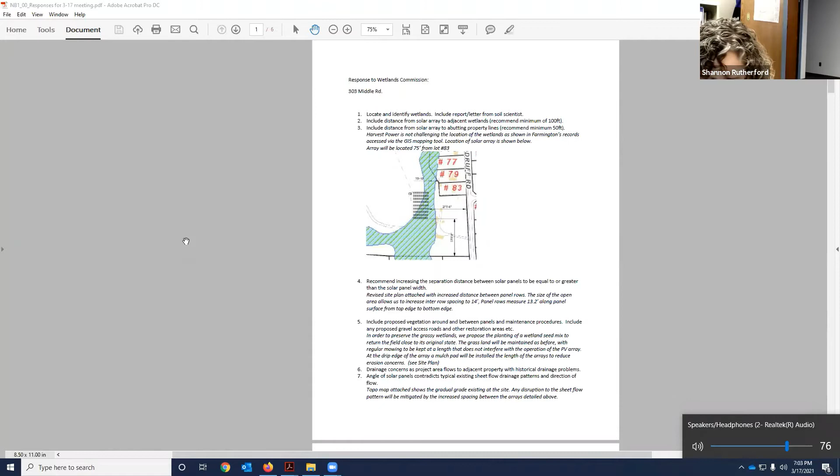So if you want to go ahead and discuss with the commission the additional information that came in last night, and we'll go from there. Okay, thank you. Thank you.

Yes, we appreciate the comments. This written response is to the comments that I got, I think it was actually just before the meeting a couple of weeks ago. And we added some more information based on some of the verbal comments that we received on the Zoom meeting last two weeks. The first three comments were really to identify the location of the wetlands and the solar system in relation to it and the property lines.

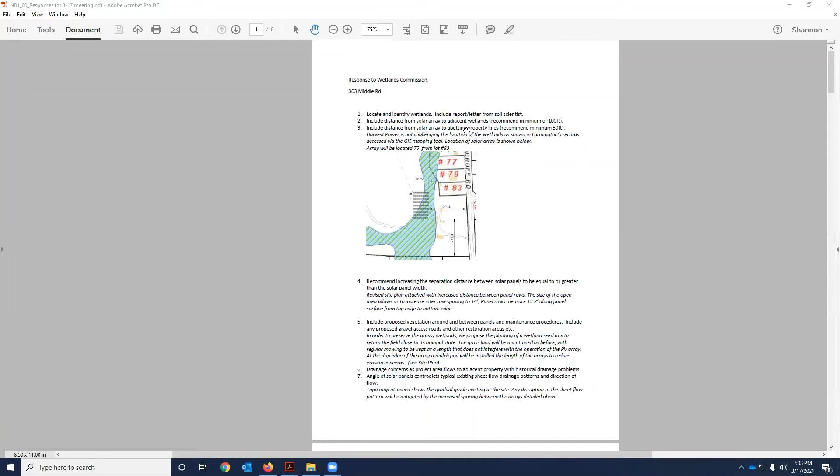Again, this is just to clarify what I said last time. You said locate and identify wetlands and include a report letter from the soil scientist. In no way are we challenging the town of Farmington's record of where the wetlands are and where our solar is. As you can see, it sits not quite squarely in it, but substantially in it. As a result, our application is about whether that has an effect on those wetlands as it is there. Like I said, in no way are we arguing that we're not in any wetlands. So that's really that point right there.

And of course, we're a minimum of 75 feet from the nearest neighbor, number 83 there, that lot off of Woodruff Road.

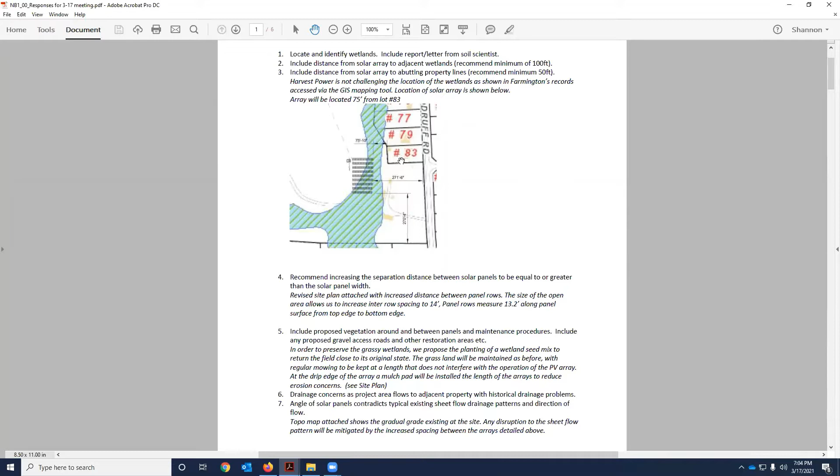Do you just want me to go through and then we'll take comments after, or is that? Yeah, why don't you go ahead and do that? That's probably the cleanest way to do this.

So regarding rainfall and drainage, we had the comment recommending increasing the separation distance between the solar panels to be equal to or greater than the solar panel width. Upon review after the meeting, we were able to increase the interrow spacing to 14 feet. That will be a little bit bigger than the panels as they stand. As they're put together, they're 13 feet 2 inches, but as they're tilted slightly, that horizontal distance is slightly smaller than that. By putting a foot or two extra in the interrow spacing, it will increase that gap to be much larger than two panels put together. So the 14 foot will be the distance from the back of one panel to the front of the next, and that'll be an area where rain can fall onto the ground as it is, as it stands and as it was beforehand.

Moving on to increased proposed vegetation around and between panels and maintenance procedures. In between those panel arrays, as well as underneath it where we can, we're going to preserve the grassy wetlands. What we have right there is a field that's been mowed. We propose planting a wetland seed mix to return the field close to the state it's in now. The grassland we maintained as before, with regular mowing to be kept at a length that does not interfere with the PV array. Again, this is just to return as much of that open space, that wetland space, to the state it is in right now, which is a mown field. This is a comment that came up from one of the commission at the last meeting, which we thought was a good idea and which we'd be happy to implement.

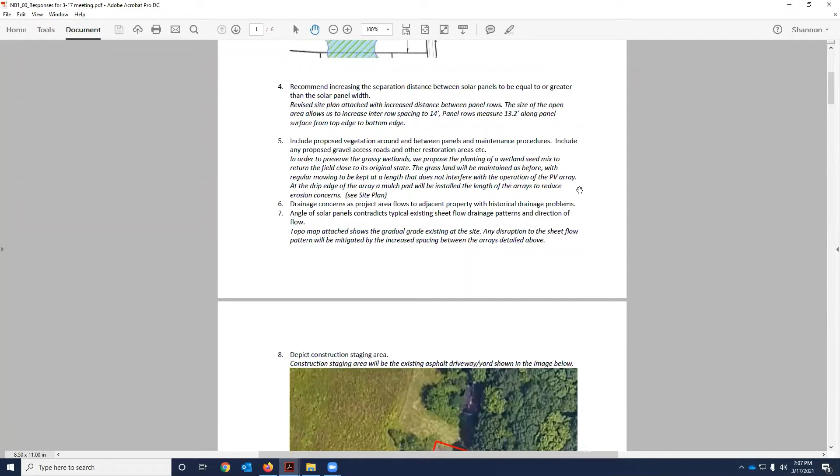Moving on, drainage concerns: the project area flows to the adjacent property with historical drainage problems, and the angle of solar panels contradicts typical existing sheet flow drainage. I added, as a bit of extra evidence, the topo map I got from your GIS website. The area is not too steep, but obviously there's a drainage pattern—it goes to the east and the north. Our solar panels, the only way they can work in this situation, is to be angled south, so that's not something we can really work with to any extent.

But it ties back into the original points: by increasing the gap between the panels, including a mulch pad, and returning the area not covered by solar—and even underneath—to the state it's in right now, will really mitigate any effect of that slight disruption in flow pattern. The rain that falls on the solar array will drip and drain to the south off that array, but then it will just resume the drainage it was going to do anyway if there wasn't a solar system on this site.

Moving on, number 8, depict the construction staging area. We're just using the site as it is. There's an asphalt driveway coming into the site where it's going to end right by some maintenance sheds and outhouse buildings, and there's an existing yard, kind of an open space there. It's asphalt or hard pack, and that's where we'll stage—where we'll set our equipment before it's moved onto the array and installed.

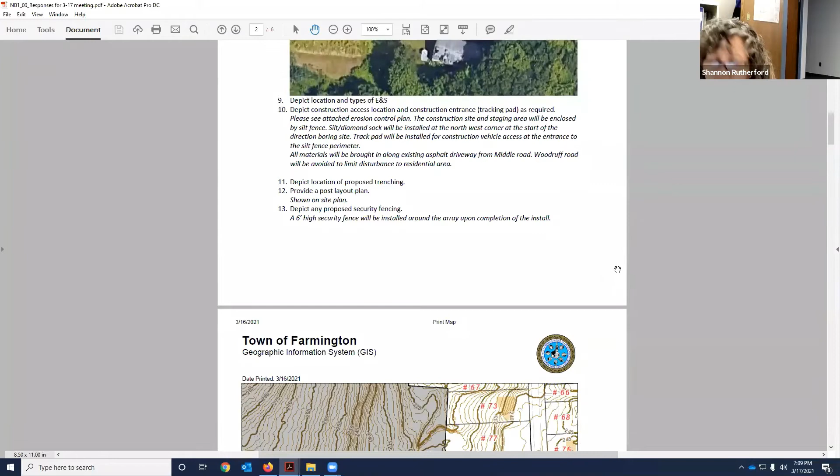We can go on to number 9 now, depict the location and types of erosion and sediment controls, and number 10. I had this as a separate attachment, Shannon.

It's a simple and effective erosion control plan that we're going to do here during installation. As you can see, we've got the array located within the wetlands as it stands.

During construction, we will be bringing materials in from Middle Road. That's the longer access from the west, but it will avoid any disruption with the residential Woodruff Road. It's not a lot of material to bring in, but there will be a few semis, a few flatbeds, and we want to avoid disrupting the homeowners there.

As we get close to the site it will be encircled by a silt fence, shown by that black line around it, just to avoid any erosion or sediment loss from outside of the construction area. As the trucks enter, they will go over a track pad just to remove any dirt or material as it's leaving or coming in. That will also encompass the staging area, shown between the 2 buildings in the southeast.

As an additional protection measure, where we're doing the trenching and boring in the northwest corner back to the site, we're going to install a bit of silt sock over there as an additional erosion control measure. It's a pretty simple but effective measure to keep the site self-contained and limit any effect we have as much as possible.

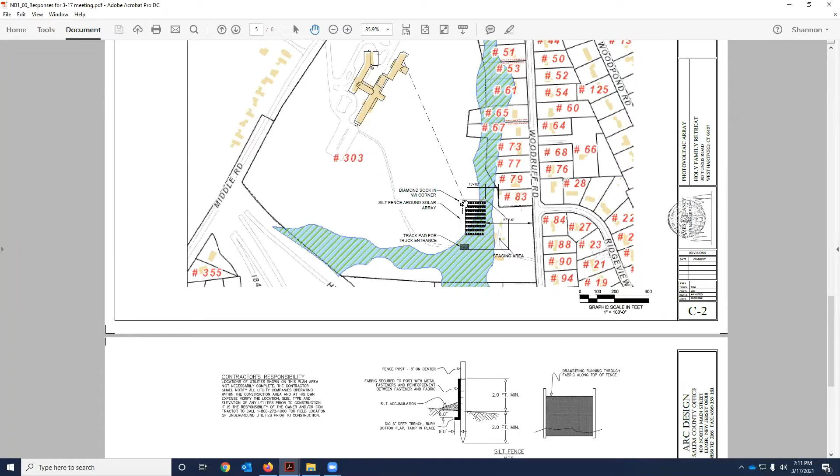Okay, we had a couple more points. Depict the location of the proposed trenching. That's from the northwest corner of the array, where our AC conduits will leave the solar system and head over to the eastern edge of the existing building, which is where their service is. That's it right there, and that's actually a wooded area in between.

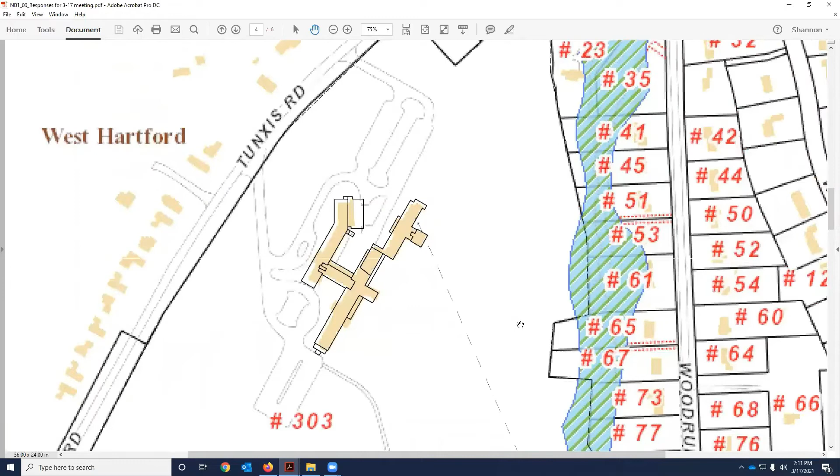And I think the final item was about security fencing. We went back and confirmed this - once we leave, at a perimeter distance of about 15 feet from the edge of the array, there will be a 6-foot high, probably chain link, security fence installed when we're done, just to keep people away from the array and as an additional protection measure for the system.

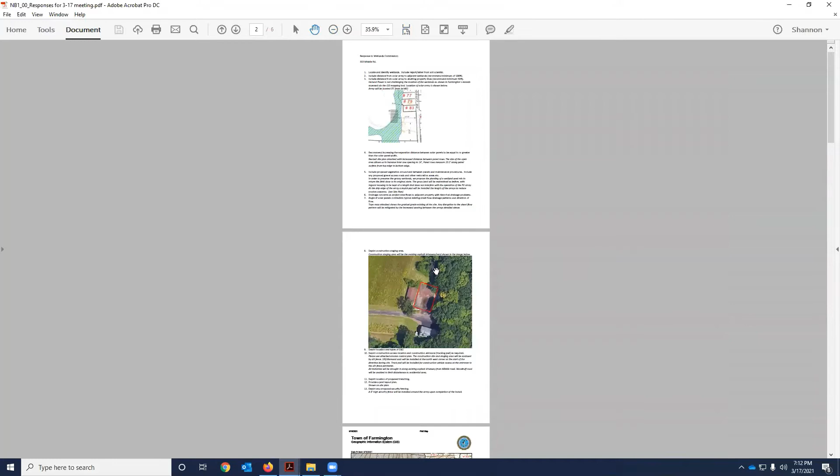So, having said that, I think that addresses those points. If anybody has any questions, we'll be happy to answer them. Going back to the original protocol we've been doing.

Rich, I'll start with you. Any questions or comments? Yeah, I have one question. I understand you're using directional drilling to install the conduit from the array to the building - is that correct? Yes, that is correct. We're going to do the directional boring starting in the northwest corner, back to the building. That's the goal, is to go all the way back there.

Of course, as we get into that wooded area, there may be some areas with rocks and stuff where we may have to do some trenching. But the goal and aim is to do as much as we can with the directional boring machine. Okay, usually when you do directional boring there's a bentonite slurry that's used.

Will you be drilling from the wetland area up to the building, or the other direction? You want me to jump in here, Tom? Yeah, could you call that? Be a good one.

More than likely we would be drilling from the wetland area uphill from that area. But in reality, let's start with probably the northwest corner - about 50% of the array is open field and grass on that side, and then there's a wooded area. So as far as setting up, we can go either way. We're also open to whatever recommendations there are as far as whether we trench or directionally bore, or both. We're not opposed to whatever means and methods. So if there's some concern about the bentonite, we can definitely trench in lieu of doing that. We're not opposed to that.

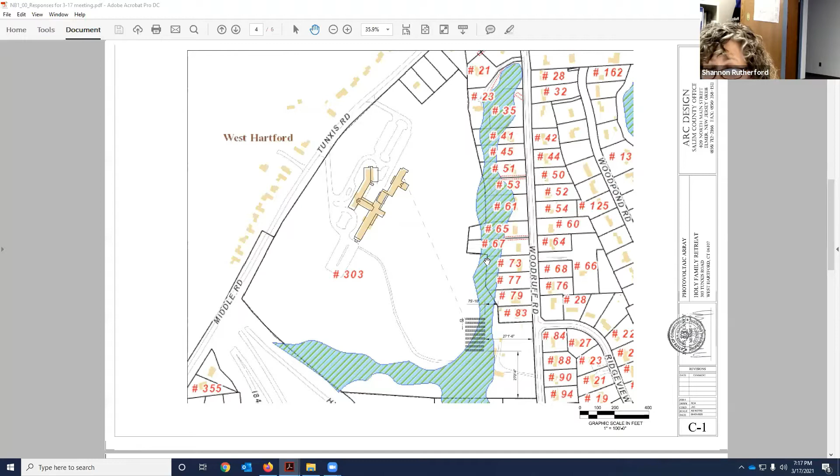So Bruce and I will look at it when there's a pre-construction meeting, and if there's maintenance things that need to be done, then we'll alert the individuals - whether property management or otherwise - that can be handled as part of this project. Okay, thank you. Yes, that's all I have.

Okay, Robert, I have no questions. Mark, no questions. Ned?

Yeah, I want to confirm - is there going to be any grading done in the area of the array, or is it basically sticking to the existing grade? It'll be sticking to the existing grade in the area. Okay.

And there is going to be—oh yeah, I see it here—a tracking pad for the trucks. Okay, yeah, that's all I had. Thank you.

Okay, Jay? I don't have any questions. I do.

Can you elaborate a little bit more on this mulch pad that you're talking about at the drip edge? The reason I'm asking is because mulch tends to deteriorate rather rapidly, so that to me indicates it's more of a high maintenance scenario. I don't know if you've looked at anything like crushed stone as a way of dealing with it. And in combination with that, would what you're proposing act in any way as a way to hold some of the water back and keep it in sheet flow form with this mulch pad for the drip edge?

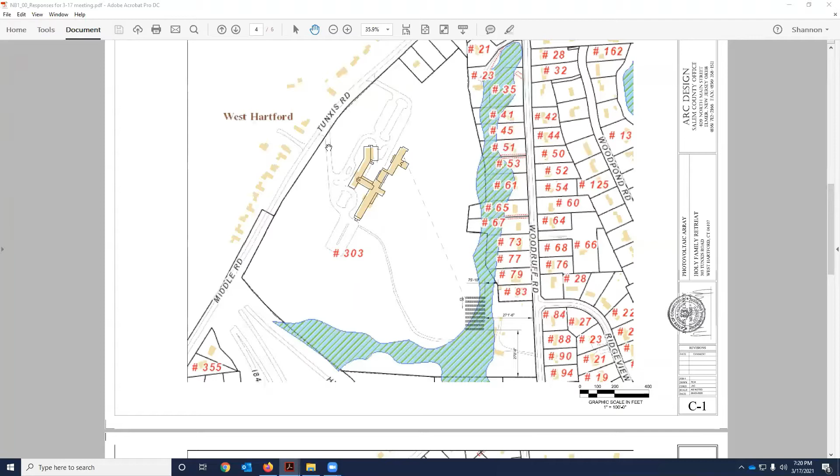Okay, and the current drainage pattern in this area—what is the current drainage pattern? We could hang on—go to the... yep, I just gotta.

So this is the access road coming down from the top. These are the buildings where the construction yard's going to be. Here's lot 83, so the solar field is right in and around here. It's very flat. We've got contour 235 here. Contour 230 is over here. I've got another 230. This is still the 235 here. Both of these are 230.

Bruce has been out at the property a number of times—Bruce here, our development specialist. The driveway almost creates a high point. You can see there's a little bit of a channel here with some of the contours. Some of this drainage flows in this direction, then meanders at the back of these properties, and ultimately picks up a drainage swale that runs—you're seeing just the start of it here—north along the back of the properties on Woodruff Road, some of which we've been in on site walks. And then it crosses under Woodruff, under Wood Pond, and then into the lake.

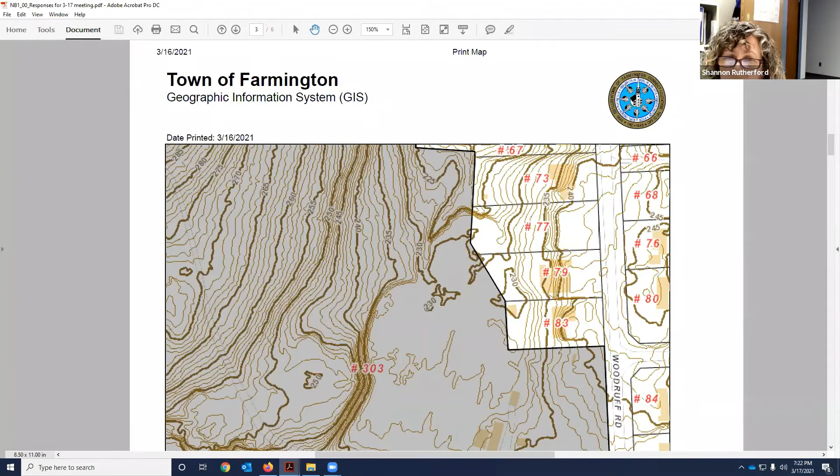So somewhere in here is a drainage divide. Okay, so basically it looks like you're staying pretty much at the 230 elevation for almost the entire area. Correct, yeah, for this solar. Correct. Okay, all right.

Another comment, it's a suggestion. Based on what I have seen from other solar projects around the state, one of the things you may consider doing with your fencing is going 7 feet high, and the reason is not so much for people but for deer. I would also recommend you mount the fence 6 inches above the ground, granted this is not that large of an area so it may not be as critical, but typically we'll see like a 6-inch gap underneath the fence between the bottom of the fence and the ground so that it allows critters to continue to have access.

So that may be something that you want to consider installing. But I think the 7-foot high fence is probably better, especially since my guess is you've got deer in this area, and I'm not sure a 6-foot fence will keep them out. They get over the fence, you've got problems. So it may be something you want to take a look at. It may save you a lot of issues going down the line.

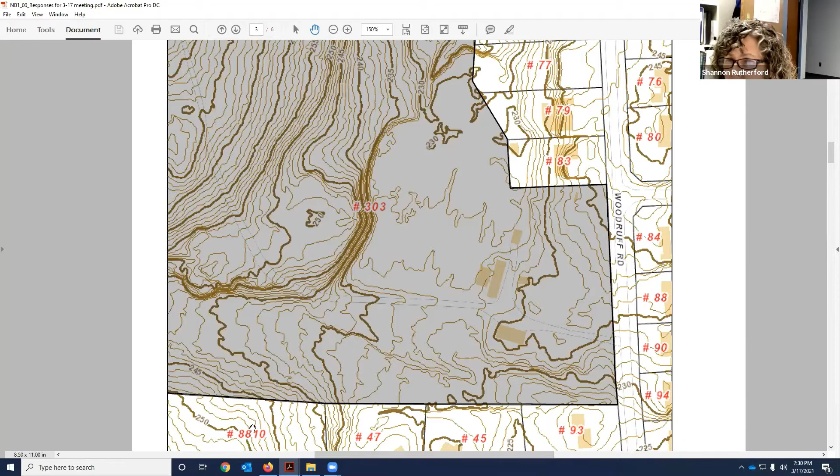Next on the agenda, Miss Porter School, 60 Main Street. Talking about the connection of Sarah Lane, and I couldn't tell you where that was to start with. It's an internal roadway. I believe we've got Katie Bradley on the phone with us this evening.

If I may interrupt for a moment, I need to recuse myself from this one as an employee of Miss Porter's, so I will be stepping back. Okay, thank you.

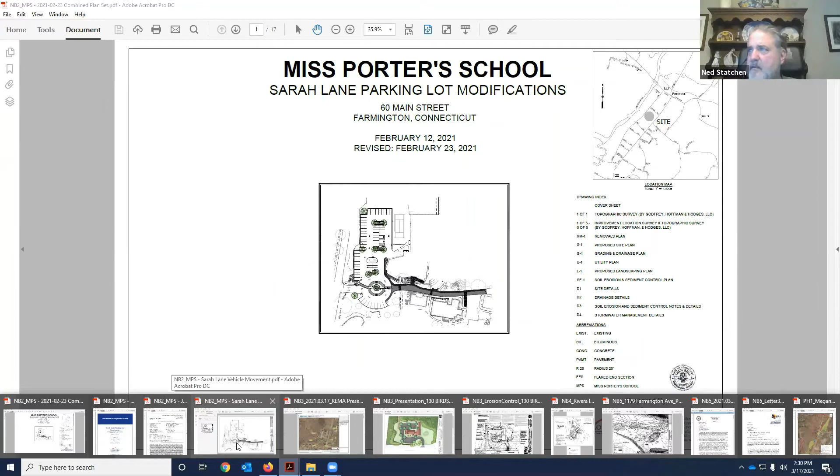Okay, excellent. Good evening, everyone. My name's Katie Bradley. I'm here tonight representing Miss Porter's school. Just briefly, over the past 20 years, we've engaged in 4 separate master plans.

On every one of those master plans, Sarah Lane, which is the internal road that runs from Main Street to Garden Street through the center of our campus, has been identified as something that we should address, mostly because of safety. It's a major thoroughfare for our students throughout the day, passing back and forth, but it also is the means of a lot of our deliveries on campus.

And it never seems to make it to the top because there's always something more glamorous and shiny to spend our capital money on. And we built fields and a library and a pool.

Fortunately, 3 years ago, our Board of Trustees decided to renovate 60 Main. We needed to update our 1950s kitchen. And in order to do all of that work, we have spent over the last year and a half digging up Sarah Lane to update our antiquated utility systems.

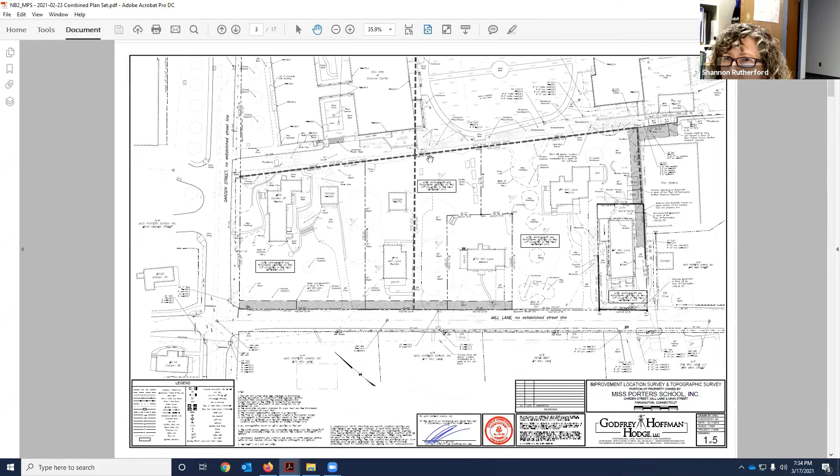Hello, can everybody hear me? Yes, we can. Hi, my name is Tristan Wallace, and I'm with Lorero Engineering out of the Plainville office. As Katie said, I've worked with her for the past few months in the design and layout of the parking area in Sarah Lane, as well as the drainage design. If you don't mind, we can start with the existing conditions.

So I just wanted to identify this sheet, which shows the current conditions of the site. There's an existing parking lot, and the hatched area is an easement, which is a throughway going up to Sarah Lane. To the north are 3 tennis courts, 2 of which we'll be removing. We'll see that in the site plan.

And then to the south, there's a wetlands pond area where the survey was done by Hodge, and the wetlands was flagged by JMM Wetlands Consulting Services in July 2020. The wetlands pond, from what I can surmise, is a wetlands retention area, designed originally for stormwater drainage.

You can see there are 2 pipes that come down into the wetlands. And if you look at the southwest corner of the parking area, there's a curb cutout — in the corner of the hatched area that kind of protrudes towards the wetland, there's a cutout there where some surface flow comes down into the wetland as well, bringing in some of the drainage from that portion of the site as currently stated. So we can go to the site plan.

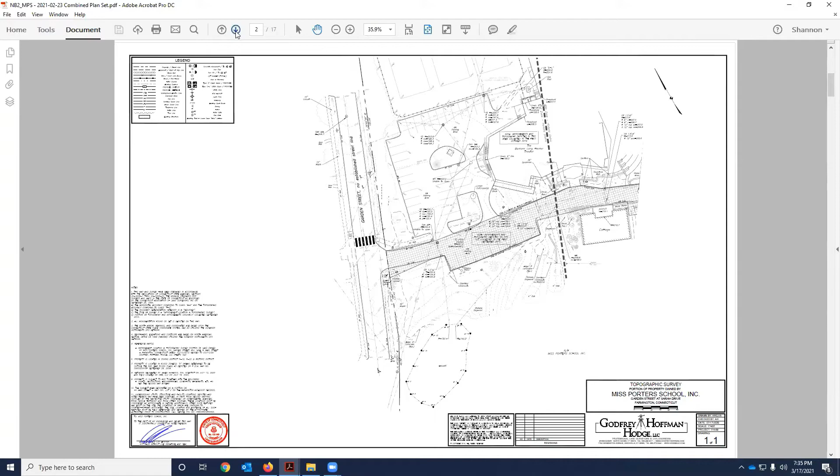Should be the next one, yeah.

As Katie mentioned, we're doing a full redevelopment and reconstruction of the parking lot area on Sarah Lane. To the north, the two tennis courts will be taken out to accommodate additional parking. Towards where Sarah Lane and Garden Street meet, a roundabout will be installed to facilitate a drop-off area for evening and morning drop-offs. South of that, we're proposing about 9 additional spots to increase parking. I believe Ms. Porter's could never have enough parking.

So that area will help accommodate the additional parking necessary for the property and its use. We are also improving the Sarah Lane access way with pavers. The width and configuration will stay pretty much the same, however it'd be resurfaced. Currently it's a mixture of bituminous concrete and walkway, so we'll resurface it with pavers to add another level of aesthetics.

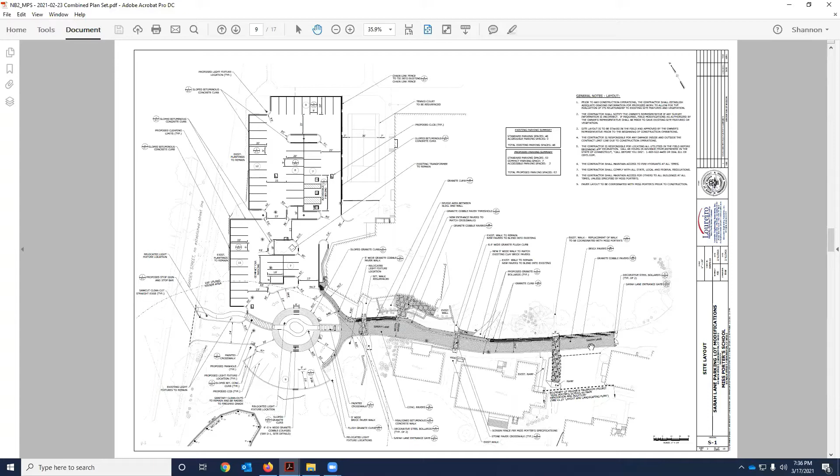As we'll get to in the later stages with the drainage plan, we're also improving the drainage in that area. So we can focus on the upland review area for the drainage in the grading plan. We have the upland review area shown with that buffer line. The roundabout area and the additional parking encompass most of that upland review area, as well as some ancillary grading to accommodate the parking.

We are providing an overall improvement on the drainage for pretty much the project area. The amount of the area is about 1.323 acres, and most of that we are capturing in the new drainage system.

As you can see, we have new catch basins and new conveyance ways, a detention system which will also have an isolator row. At the last catch basin, right before the discharge into the wetland, we're also providing a hydrodynamic separator to treat the runoff from Sarah Lane and any runoff in the parking area not captured by the detention system. Overall, we're reducing the flow to the wetlands pond in all storms, from the 2-year storm up to the 100-year storm. So there's a reduction in peak flow and an improvement in water quality as well.

We can go to the soil erosion and sediment control plan. Is that one more? Utility or landscaping. There we go, yeah.

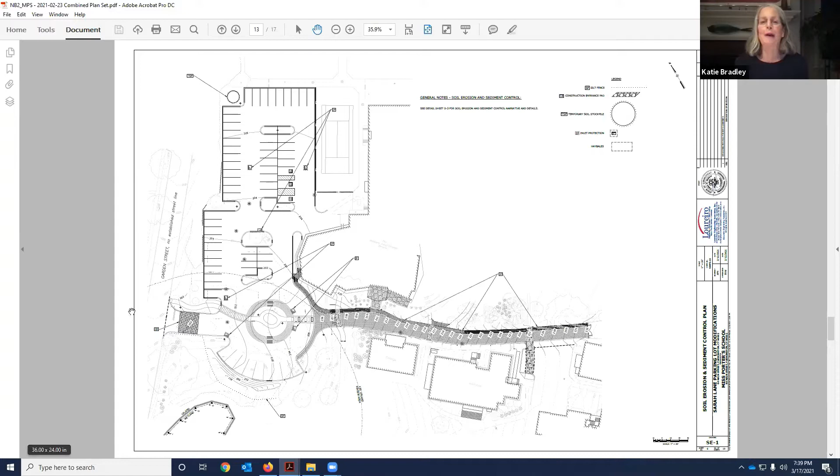I don't know if Katie, you want to say anything more, or we can take questions at this point. Unless you want me to say more, Shannon? No, that's fine, I can talk for hours, but I'm pretty sure you want to get answers from Tristan. Yeah, no, that's fine, we can go to questions. Where'd my chair go? I'm here, I think, there we go.

Rich, any comments, questions? The only question I have - I'm a little unclear where the outlet from that wetland area is and where it goes. Right, so the wetland outlets to the southeast, it's not shown on this plan, but it goes underneath Garden Street, where I believe it continues on. Either it ties into the drainage in Garden Street or it continues on underneath. I'm not fully sure, but for the basis of our design, we felt since we weren't increasing the peak flow to the wetland, the outlet would be able to handle any flow we were presenting.

Okay. No other questions. Okay, Emily? I have no questions, thank you. Okay, Dave? I don't have any questions either. It's less flow and more treatment, so it looks good.

Mark? Yeah, as I see the improvement that's being put in, I think it's going to do more to protect the wetlands. Construction is going to be nearby, but I think they're going to take controls to make sure nothing affects the wetlands, so I'm fine with this.

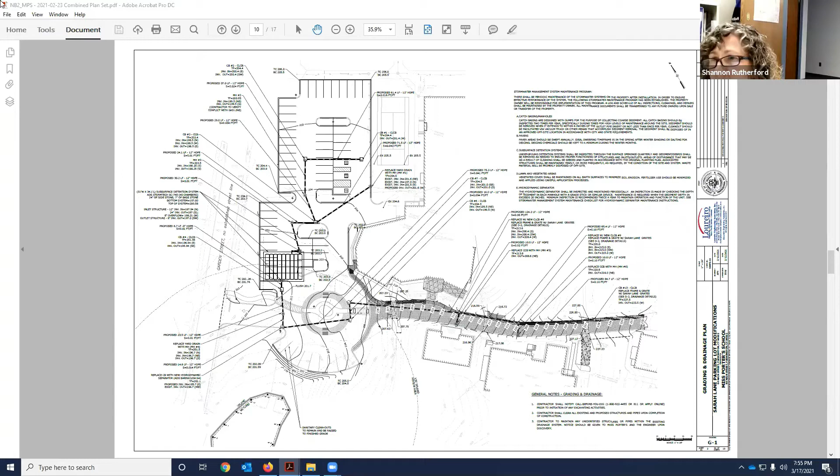Next item on the agenda, 130 Birdseye Road, a regulated activity to upgrade a parking lot design and related site improvements.

Yes, and I believe we have Biff Schechinger on the phone. Hi, I'm Biff Schechinger, landscape architect, licensed in Connecticut. This is the proposal for renovating the old Connecticut School of Broadcasting into a medical office facility. With me is George Logan. I'll let him go through the wetlands analysis and everything, but I'll give you the highlights right now.

We're not impacting any wetlands directly. There's no water quality renovation strategies installed in this currently, which we are going to install. We've worked pretty much within the development envelope, except for creating these two water renovation basins. We've reduced impervious coverage on site, and we've also reduced it significantly, 1,600 square feet plus within the upland review area. So with that, I'll let George take over and go through the wetlands, and then we'll just wrap up and answer questions.

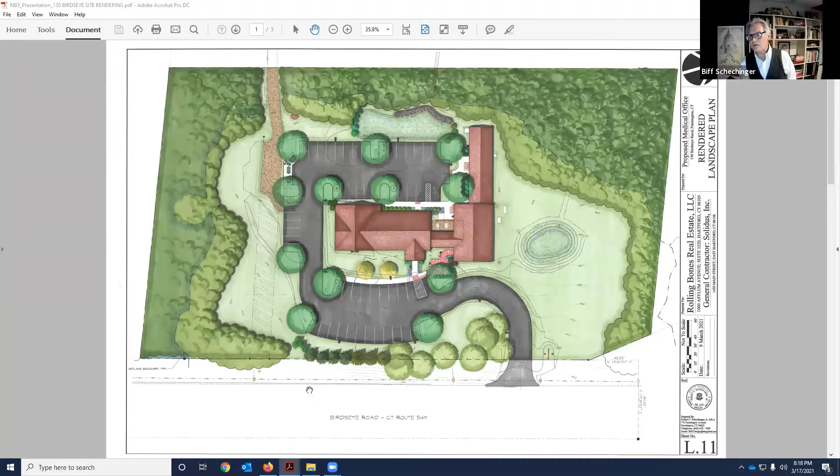And then my other question is, on this project, the footprint of the building is not changing at all? That is correct. And is the roof runoff addressed? We're picking all of it up. There are only a few roof leaders, and we're picking that up in front - you can see they come into the yard drains. In the back, everything just sheet flows; there's not enough topographic relief to discharge them any other way.

But they were all accounted for - that entire area was accounted for in the renovation water quality basins. Okay, that's all I have.

Thank you. Sorry, Ned. Is Mark back on? Yes, I have no questions. Okay, I've got a couple.

I didn't have a chance to really look at this before the meeting, so can you explain how you propose to construct the filtration berm? I think there are specifications on the plan, and George can correct me - it has an internal core of coarse sand and pea stone wrapped in Mirafi 140, and on top it has modified riprap.

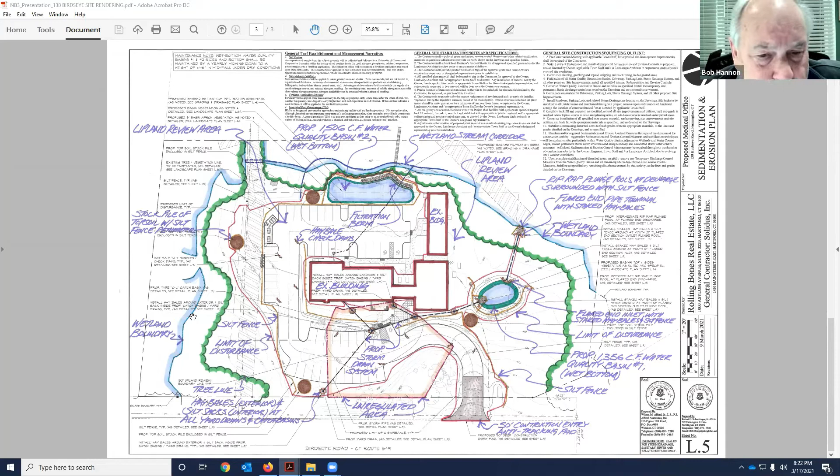Sure. And the one other comment I'll make, having grown up about a 5-minute walk from this place, I fully understand what you mean by having a very complex system of catch basins - or sump pumps in the building, because our house was just right down the road, and we've got 2 of them there still filling every spring and wintertime. So I can appreciate what the groundwater is like in this area. If that's something that could tie off into the water basin you're putting out there, that might be a little better than just having it run out. I think that's one of the things you said you're thinking about doing anyway.

Good point. The one thing, if you remember George's photograph, the whole northern half of Basin 2 on the western side - right now there used to be foundations for a group of satellite dishes there, so that's been a very disturbed area. We tried to utilize the areas we had available, but that area was eminently usable. When you saw the photograph where he showed his car in the background, and in front you saw some concrete cones, that's the area pretty much where the basin comes to on Basin 2 in the back. I can tell you for sure that western boundary - the wetland used to be probably into the parking lot originally, and that's been filled and then ditched. So that's all disturbed areas, nothing natural there.

Okay, that's good to know. Thank you.

I had another question. With the previous use of the building for the broadcast school, there are some antennas behind the building. Are those tied to this property in any way?

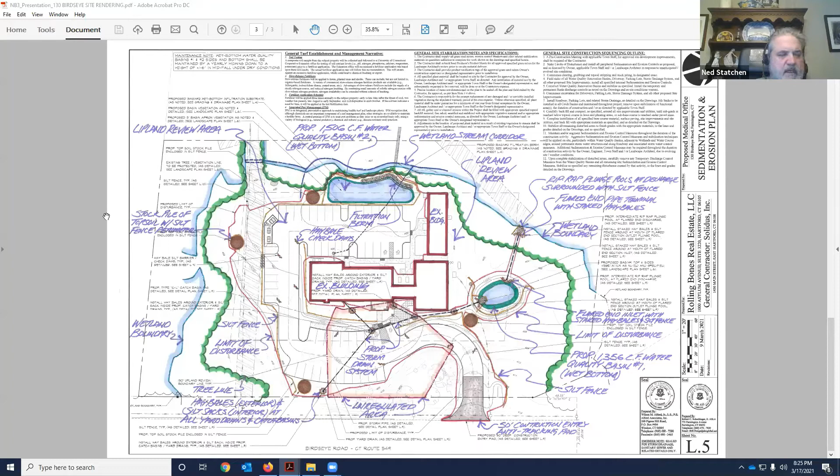Here's my question. I understand the road, and looking at Google Earth I see the cell tower with all the antennas, but there are also 3 towers. If I remember, when this was a broadcast school, those were tied into the school. Now is there any kind of relationship between the change of use and those towers? Who's responsible for those towers now? If this is no longer a broadcasting school, who's responsible for them?

Those towers are a separate entity. Whatever the easement says, I can look up the plan right now. Give me a second. The school used to have satellite dishes, and those are where those concrete stumped-up areas are, right in there, and we're taking those out as part of basin 2. They show up on Google Earth. I see the satellite dishes, but it looks like there are 3 antennas in addition to the cell tower, and I wasn't sure if somebody was responsible for these.

So, those are up, here's the property line. These towers are on the property behind, which is quite extensive. The company is called Easement in favor of Sprint Spectrum, so they own and maintain those towers. They're still being used, yes absolutely, and they have no relationship with the facility.

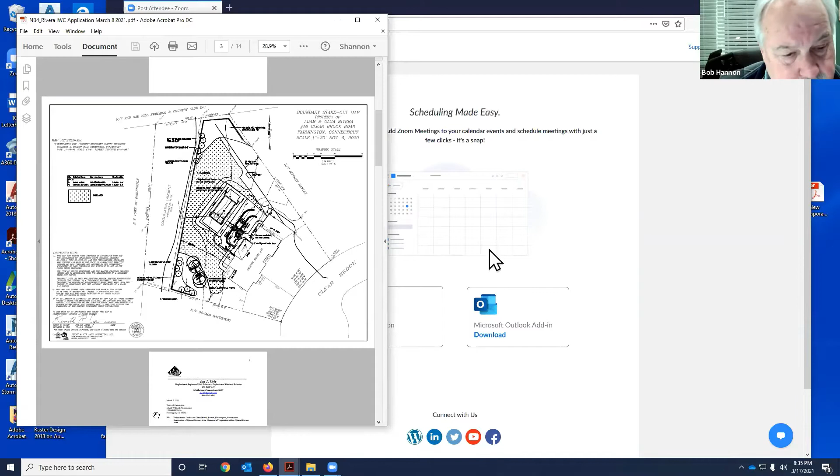Thank you. I think we have both the homeowner and Ian Cole on this evening. I don't know which one of you wants to take the lead with this, but you're welcome to jump in.

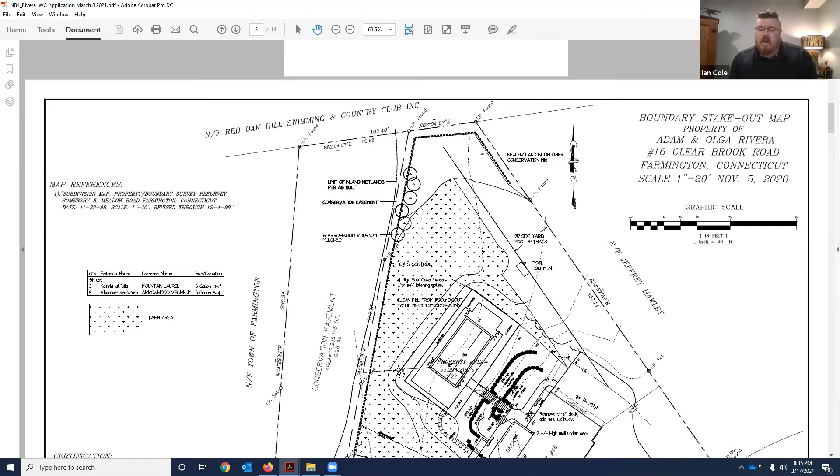Sure, good evening. For the record, Ian Cole, professional soil scientist, professional wetland scientist. I'm here tonight on behalf of the Riveras. The commission remembers last we met was back in January, the beginning of the year, and then we discussed the enforcement order the Riveras received for the unpermitted clearing of vegetation in the 150-foot upland review area. If the commission remembers, this was a scenario where vegetation was removed between the existing lawn and a conservation easement. We're talking about a 40-foot wide band of early successional habitat that was cleared, bisecting their property. As Shannon had stated at that January meeting, the clearing was done in preparation for the planning of an in-ground pool.

To that extent, at the recommendation of both town staff and the commission, it was expressed to come back to the commission with a comprehensive plan for all of the proposed activities in the backyard and fold in a restoration plan for those activities in the upland review area. So here we are, we came back, we have our planned improvements and restoration activities for the commission's consideration.

These plans were designed in coordination of a team. The Riveras hired Giuliano's Pool, a local landscaping company, Local Choice Landscaping. They worked with a landscape architect, Germain Designs, and again enlisted the survey services of Flynn and Cyr Land Surveyors, as well as myself.

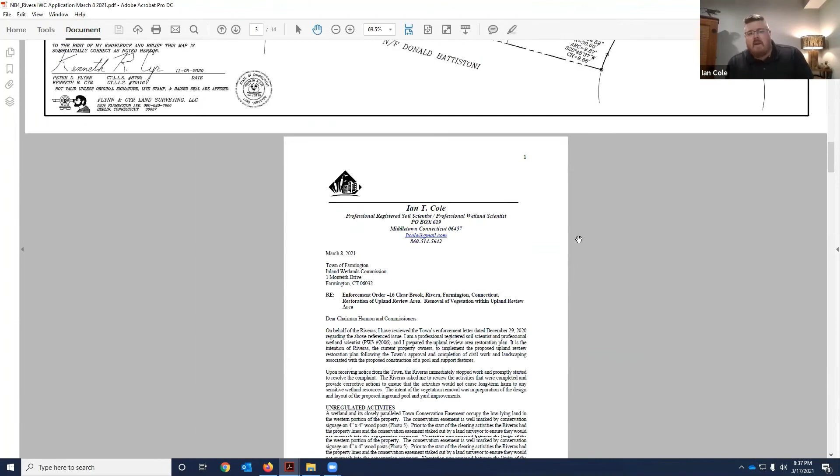Probably the easiest thing to do, Shannon, if you can go to my report that I submitted to the commission and go to page 5 of 11. I have the site plan in there. I've embedded it into the report, and it shows a little bit of color that maybe helps tell the story a little bit better for the commission.

So here we have the property. To the left-hand side, that blue shaded area is the jurisdictional wetland boundary. The sliver of property between that blue polygon and the hatched proposed lawn area, that dashed line, is the actual conservation easement that is marked in the field by 4x4 posts with signage on them. The Riveras, before they started any activities on their property regarding the clearing, had a land surveyor stake out the property line and the conservation easement to make sure they did not encroach into those areas. As was last reported, for the commission's edification, no clearing occurred within those regulated areas of the conservation easement, and certainly not within the wetlands proper.

So I guess the first thing I'll go over is probably the overall plan is the easiest thing to start with. The yellow polygon here is the bulk of the backyard improvements. We can see there's an outline of a pool and some terraced retaining walls that come down to the pool. There's about a 6 to 7 foot elevation change from the backyard where you come off the deck to where you drop down to the pool. So to minimize the footprint of grading, there are 2 boulder retaining walls that drop down to the pool. All the material for grading on the site is really going to be recruitment from the excavation for the pool, so we'll have the beneficial reuse of that. We're not anticipating importing any materials. This isn't a big earth-moving activity.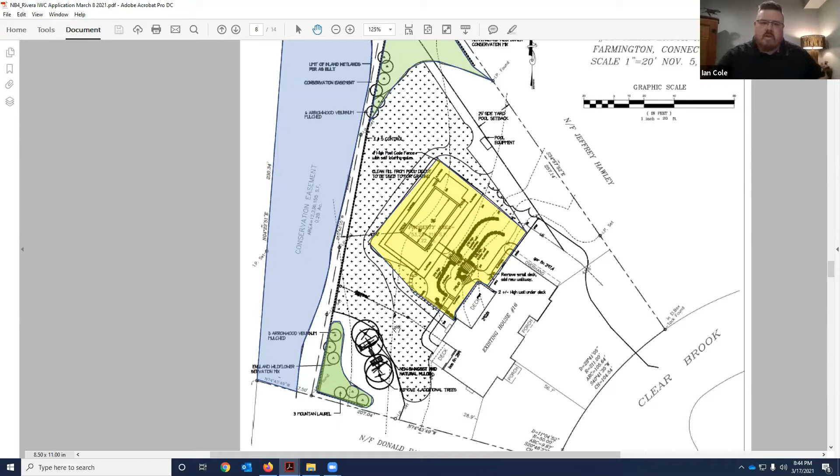And I think it's important to note that the sensitive part of the wetland is the inflow channel part. There's an intermittent water course that runs along the extreme western limits of the property, and we're over 60 feet from that - a 60-foot vegetated buffer that's very, very flat.

In my report, if we could scroll down, there's some figures and background information so we can see the limits of what was done.

So on page 6 of the report, if you remember, this goes back to 2009. It kind of shows the conditions of what the backyard was. Here we can see in the middle, where the cursor is, early successional habitat, and then we have a forested area to the north of that clearing.

If we scroll down to the next figure on page 7, in contrast this is 10 years later, 2019. Again we can see the area that was cleared, shrubby early successional habitat, and we can see the establishment of the lawn there, kind of in the center of the property where it says lot 16.

And then we'll move along to figure 4 on page 8. This is just a bird's eye view of the property. We can see that hole in the middle of the forest canopy there, that was the early successional habitat. And you can see in relation where the water course lingers along the western property line.

Moving along to page 9, I have a couple photos of what the area looked like prior to the vegetation removal activities in the upland review area. It might be a little hard to see, but in photo 1 we can see that tree line in the background. That is essentially the tree line of the conservation easement that's staked out. So everything in the foreground here is the type of vegetation that was removed. Again, you can see mostly saplings, smaller stuff, shrubby stuff. These photos were taken in November 2020, right before the vegetation removal occurred.

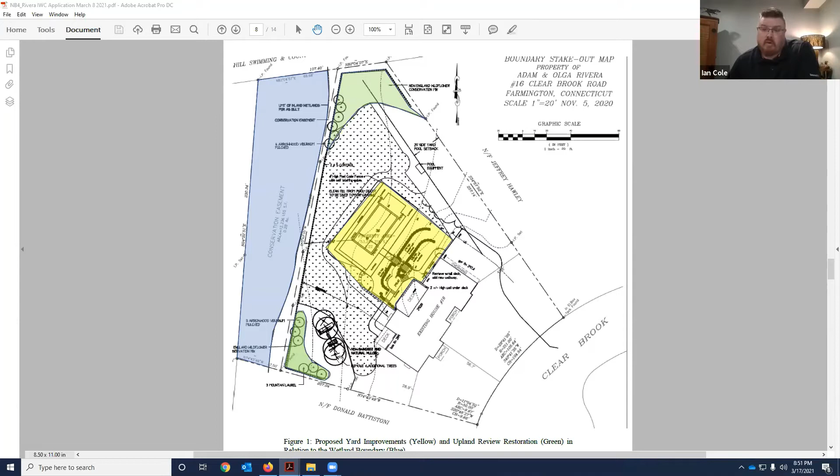Just looking at the plan, you're going to remove 4 additional trees near the swing set? Yeah, those 4 trees were slated to be removed when the arborist and landscaping company was assessing tree health. But they stopped because as soon as they got notice from the town with the enforcement order, they immediately stopped work and started to resolve that issue. So that was an outstanding item. Those trees are close to the house, and with a playscape there, nobody wants some widowmaker above their kid while they're swinging on the set. So that's the intent there.

What are those trees? I'd have to look. There may be, from the best of my recollection, some hemlocks in that area and maples. Okay.

I just, there's been a lot of clearing done out there, and I'm kind of disappointed that we're still continuing with the clearing there. I don't know, there isn't another place to put the swing set.

Yeah, we've moved things around quite a lot on this plan, moving the pool around, moving the swing set. We think this is the most logical place. These trees are not in great condition right now, I can tell you, and they're up against my house, causing quite significant damage, in fact, to the house, and contributing to a lot of mold and fungus on my house. In talking with arborists, the landscapers, the landscape architect and Ian, I think everyone agrees these are not specimen trees, they're not adding any value. They're not that healthy, and there's frankly loads of trees all around there and behind there that go into that naturalized area, and then certainly within the conservation. So that's the best spot for the swing set for us.

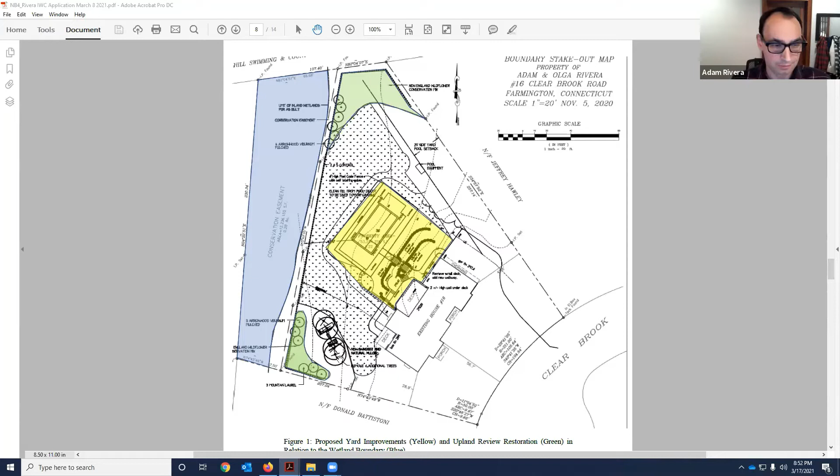Okay, I didn't get from the plan that these are encroaching in on the house, but I guess if they're doing that, then that seems reasonable. It's not, you're right, Commissioner, it's not the best depiction. They're actually much closer to that deck right there, that far deck that you see. In fact, I'm standing in my office, which is right next to them, and when you're standing on that deck, you can reach out and touch the tree branches. That's how close they are to the house at this point. So it's probably on me - I should have been more attuned to the landscape architect to make that more clear, that that's actually closer to the house than they are. Okay, all right, that's all I had.

Jay? Just a couple of quick things, not really questions necessarily, but I'll throw them out there. I hadn't caught about the trees, but I do always take notice when I hear about tree removal, but it sounds like what they're talking about doing makes a lot of sense. This is maybe a more procedural thing - are we dealing with two different things here? Are we still dealing with a cease and desist and the application? To whoever, Bob, whoever wants to answer that. Yes, it is both - we're hearing about both matters simultaneously for a cohesive presentation, but there will be two votes. Okay, that's kind of what I thought. I appreciate that, and that's really all I have. Thank you.

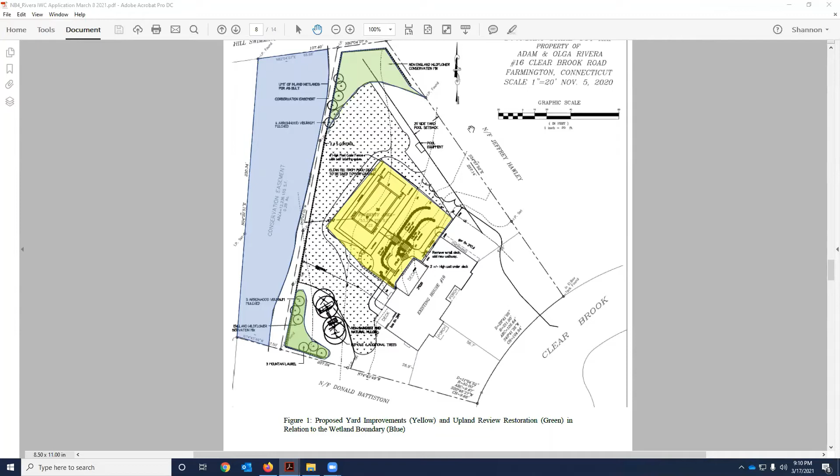And then, this is Ned. So we would, I think, as part of the restoration plan, require a report back from the soil scientists either in the fall or winter, as to how everything has taken.

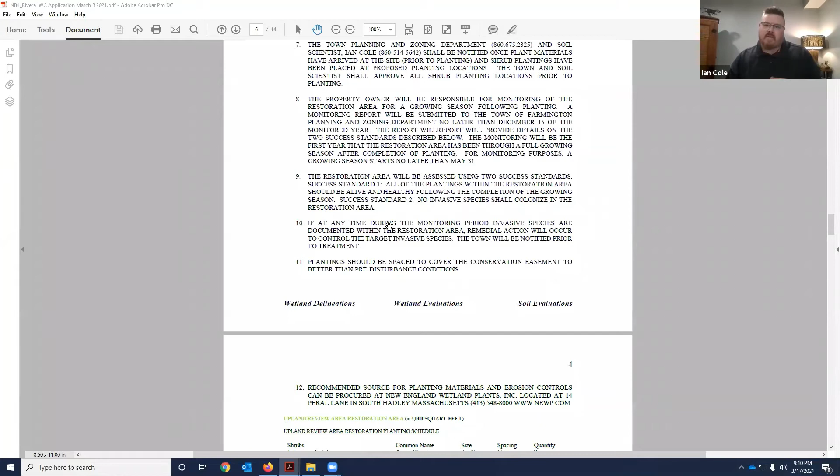Yeah, this is Ian. In the restoration plan, there's essentially 12 recommendations in that plan, and these are kind of the standard language: we'll monitor it for the growing season, report back to the commission by December 15th. We'll notify the town once we secure materials and lay them out, and once erosion and sediment controls are in. Our monitoring report will be assessed off of two standards: one being the survivability of plants and, if needed, replacement of those plants, and two, ensuring that no invasive species have propagated in the area as a result of our activities.

Okay, that sounds good.

So Shannon, we don't need to include the timeline specifically, do we? I mean, we pretty much know what it is, or does that need to be included in a motion?

No, I'll make a note of it in the revised version. So if I can get a motion that approves the restoration plan, and one that—because pretty much the restoration plan, some of these steps pretty much talk about some of that timing—so approve the restoration plan and authorize me to release the cease and desist so that the work can commence, then we should be good to go.

Okay, somebody want to make the motion? I'll move to approve the restoration plan and lift the cease and desist order. The restoration plan should include use of wattles or silt socks in lieu of silt fence, installation of conservation easement markers at 50-foot intervals, that all contractors receive a copy of the Ian Cole restoration plan, that notification prior to work occurring be made to town staff for oversight and scheduling, and that the restoration areas be completed as soon as feasible in the spring.

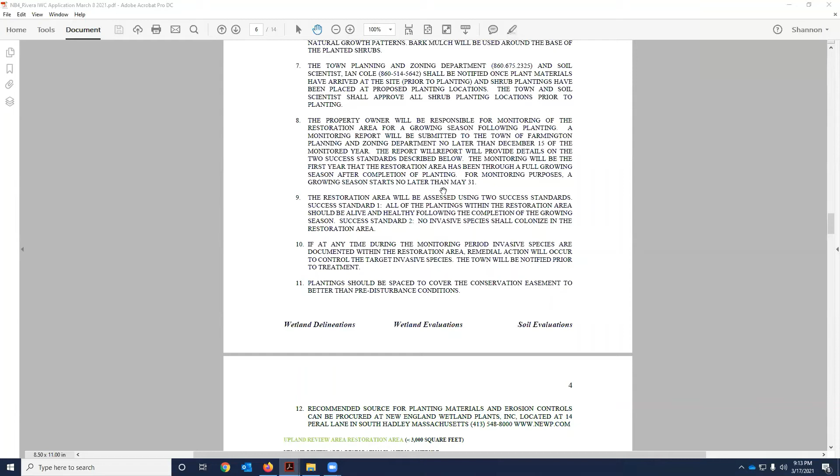So those in favor, say aye. Aye. Aye. Opposed? Abstaining? Okay, so it sounds like the contractors can start figuring out what they need to do.

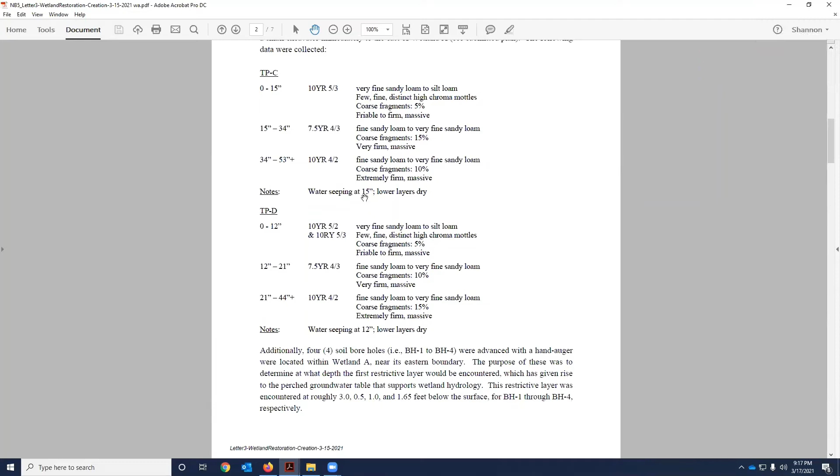If you see the corollary at test pit D, it's a little higher up in the profile, at 12 inches, and we had water seeping at those two firm layers. Underneath that first firm layer there's another layer that's even more dense, extremely firm and massive. That's the layer we saw in earnest on test pits A and B on the other side. We didn't see the first restrictive layer as much on that side, but we saw it on this side.

So what I did, and I'll show you in the plan in a bit, is I realized it looks like we might have a little different geohydrology on this side, which makes sense now that I look back at it. So I went into the wetland with my auger and did four locations to find where the restrictive layer is, which is perching the water in this wetland, wetland A. I put those boreholes in, and you can see it's kind of variable and confusing - 3 feet, half a foot, 1 foot, and a little over 1.5 feet.

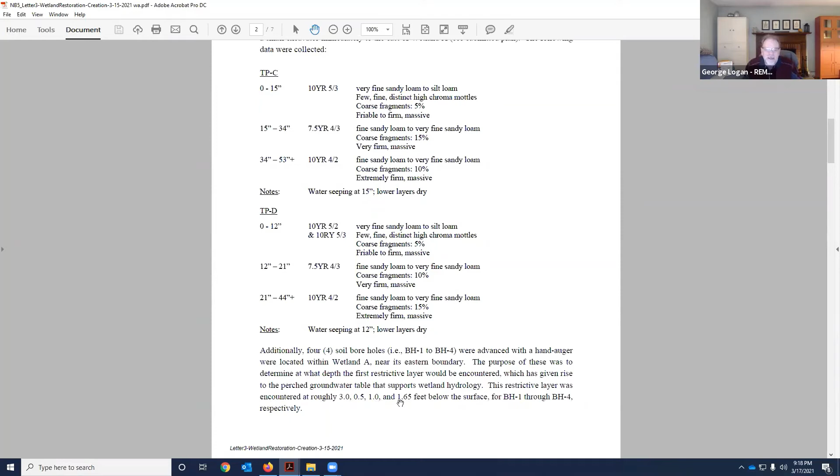So let's go to those pictures, then the plan after, and I'll explain what we're doing. This was test pit C, the first of the second series. You can see there's water in the bottom. There was snow back in January when we did the first test pits, but I did notice it was moist - the surface was moist, but I didn't see any evidence of hydrology below the surface.

Well here it's quite obvious, even though we do have a little more snow, so that might account for it a bit. But what I determined, and again this isn't definitive, just based on what I did, is that the subsurface hydrology of wetland A is perched on these restrictive layers we see here. It's slightly depressional, so you have up to 1 foot or so of water in the central portions, a little less in the surrounding portions that I delineated as wetlands. The delineation was basically done, as you might recall, based predominantly on wetland hydrology and wetland vegetation, because the soils weren't definitive everywhere.

So I think what's going on is the water in wetland A is slowly moving towards this eastern area and away from the western area, and I'm pretty convinced that's the case. So that means this is a much better area for us to ensure wetland hydrology.

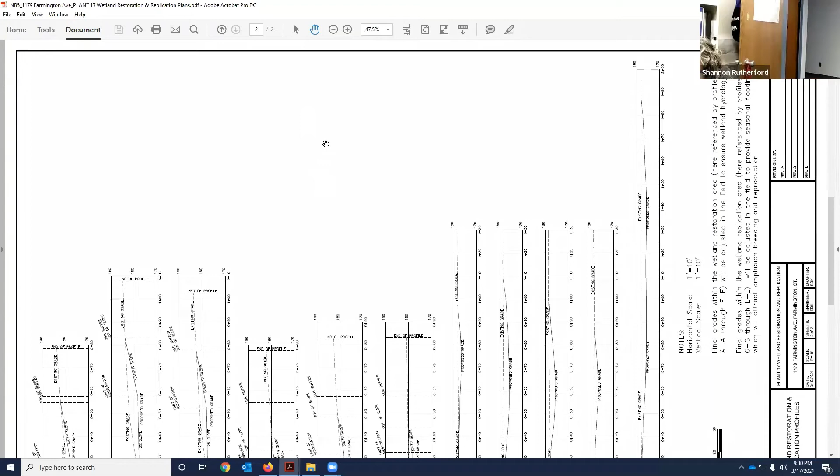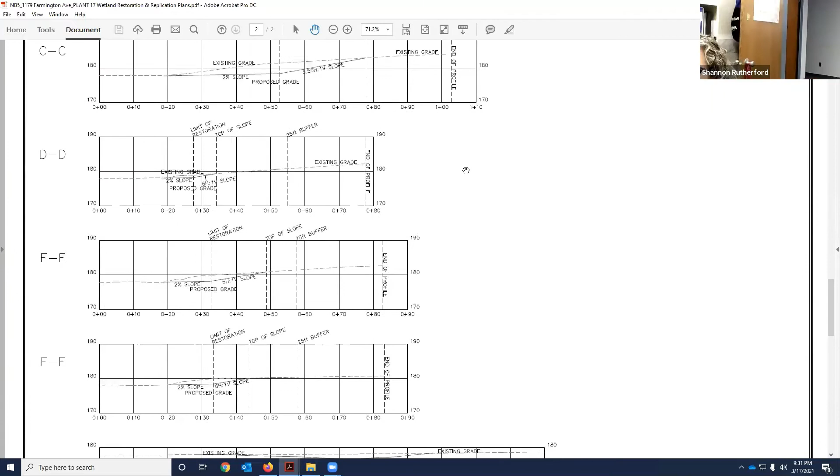So we went out and did some topography, and we have these profiles generated. If we can go to the profiles, can you turn that sideways possibly? Okay, everyone turn their head to the left. Let me see what I can do. I don't think I can once I'm in screen sharing mode. Yeah, it kind of limits things. Oh, here we go, here we go, beautiful, there we go. All right, I'm not going to have a crick in my neck when I go to bed.

Starting in the west, A, B, C, D, E, and F, you can see the 25-foot demarcation buffer limit, the top of the slope, the existing grade, and the proposed grade. You can see there you've got a 6-to-1. The steepest one is the second one, right here, at 4.5-to-1, and everything from then on becomes more gradual. In some cases, like these profiles, we don't even reach the 25-foot demarcation buffer, it's further away, so we could potentially get even gentler slopes within that 25 feet.

So that's kind of where we are, and I know Ed will, I'll let him speak for himself. I know Ed thinks, and I can understand that, the gentler the slope, the less the risk that these things will slough or erode, as we've seen happen out there already with the gullies that have formed.

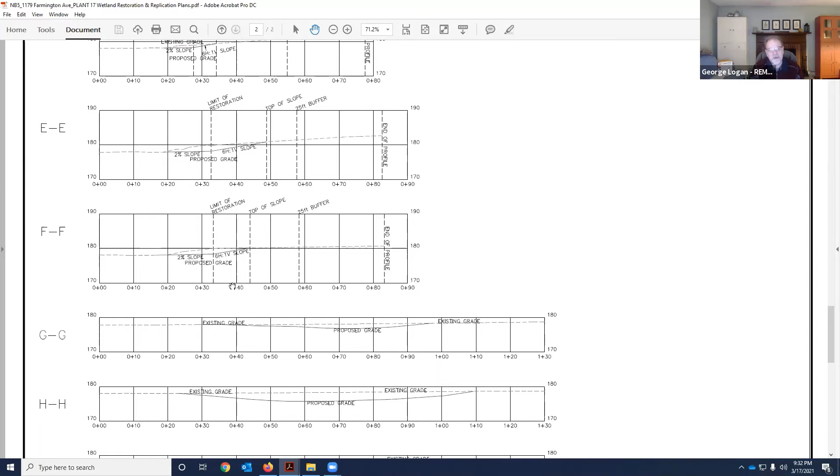But if we're intentional in what we're doing here, we can certainly stabilize even a 3-to-1 slope, certainly ones that are more gentle. We can have specific mid-slope erosion and sedimentation controls if we needed to.

I guess what I said in my report, which is true, and I just experienced this the other day doing some wetland inventory. There are wetlands out there with stable slopes that are 3-to-1 or worse, right up against a natural wetland. So that's not an unusual situation.

And if we're intentional in what we do, we can certainly stabilize those. Now, one thing that it doesn't show here, which might complicate things a little, is that within the limit of restoration—let's look at F, right in the middle there—we see that from the edge of the existing wetland we have a 2% slope, and that's going to be the average slope.

It will be slightly depressional because, as you recall, one of the things we mentioned in the field and previously is that we probably would have to go a little deeper than the pre-existing condition, because that condition had two layers: a top layer that was somewhat restrictive, which was where the old roadbed was, and below that the red stuff we've seen everywhere else. So we'd have to dip a bit into that, meaning the area we're restoring will be more depressional than before, to ensure there's a proper amount of hydrology.

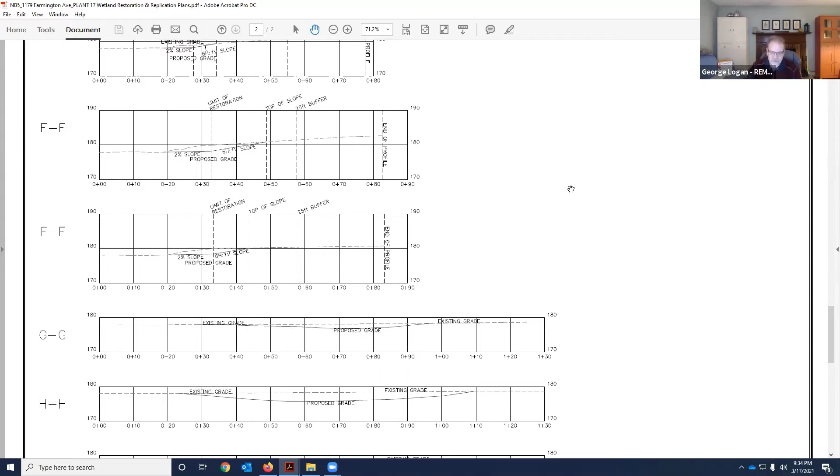Mr. Chair, we do have Ed Pawlak on the call this evening with us if you would like to hear from him. I would—I see his smiling face at the bottom of my screen. Okay, we want to go to Ed now and then do questions. Okay, yep. All right, Ed, go.

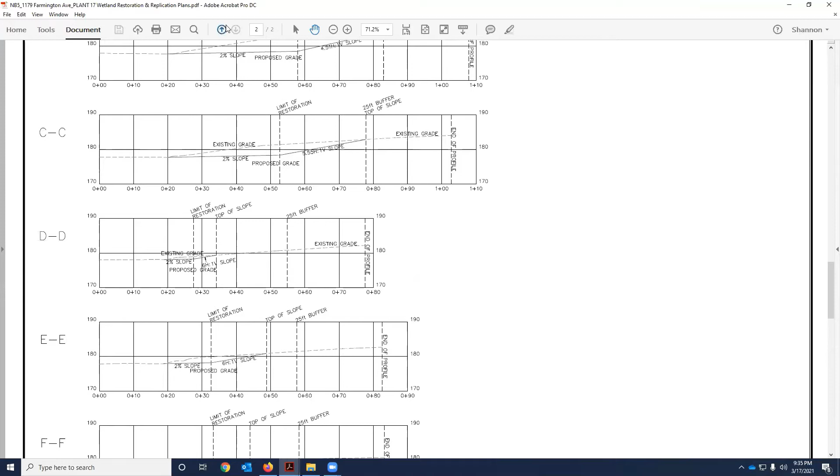Good evening, commissioners, colleagues. I've not yet received a full-scale copy of the restoration mitigation plan that is on the screen right now.

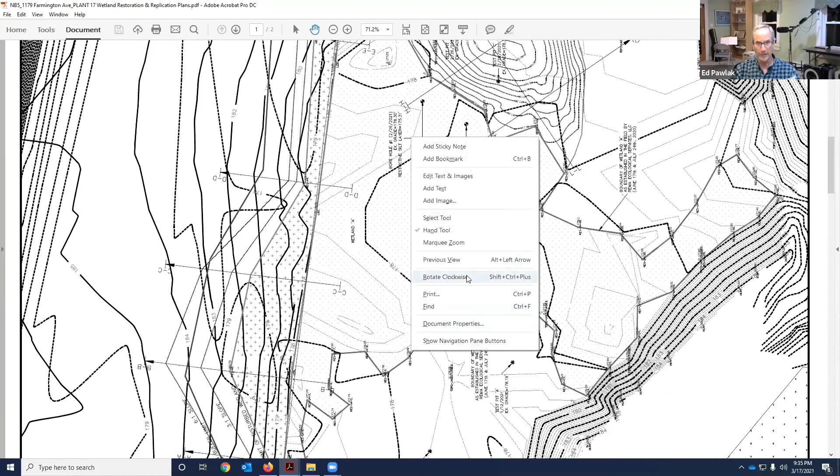I simply printed out, on 8.5 by 11 paper, the plan and the profiles that we were just looking at. And it's very difficult, if not impossible really, to interpret this grading plan on an 8.5 by 11 sheet.

I need to be able to look at the full-size plan in order to really get a better understanding of what the existing grade is, and where the restoration is now proposed, which is now on the east side of the wetland.

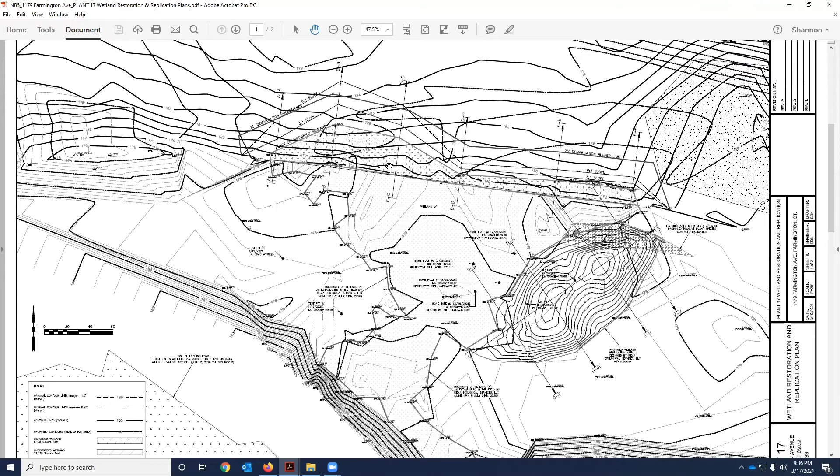So my comments right now are really preliminary, and quite honestly limited by the fact that I've not received the full-scale plan, but I understand it's in the mail, and I'll have a chance hopefully very soon to take a look at that. But nonetheless, I can offer some comments on the narrative of the restoration plan.

So you did have a perched water table—we can assume that means you had a perched water table at 15 inches. And as Mr. Logan stated, it appears that perched water table is sitting on top of very firm, or extremely firm, compact soils. So that's encouraging for a proposed wetland creation area.

If you have a confirmed perched water table in that area, then through excavation and proper grading, it's reasonable to assume you'll be excavating into and exposing that seasonal perched water table. And as Mr. Logan pointed out, there was evidence of that on the east side of Wetland A. So it was encouraging to observe that documentation of subsurface hydrology at those two test pits.

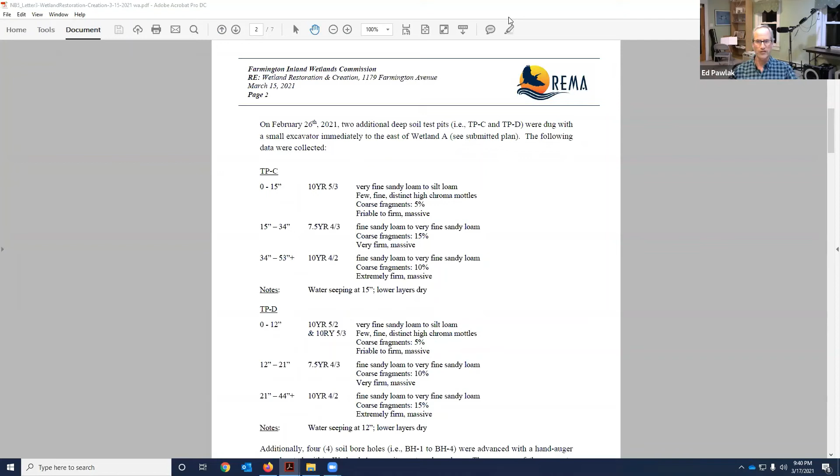And you can only determine that if you have topography at that eastern end of Wetland A to see what the surface hydrologic relationship is between the boundary, the edge of that wetland, and the proposed mitigation area. So I request that be included.

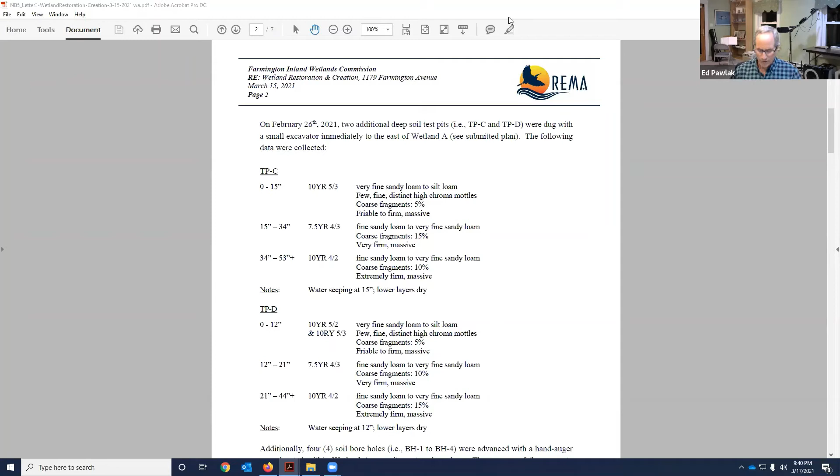On page 3, Mr. Logan writes that the hydrology of Wetland A does not depend to a great extent on the contributing watershed, but on direct precipitation. But quite honestly, there's a lot of educated guesswork involved at this point, because we don't have the detailed subsurface studies that have been done.

So at this point, we don't know for sure what is driving the hydrology of wetland A, but I'm considering the amount of water that I saw being retained within the center of that wetland. It certainly looks to me like it's more than just direct precipitation. In fact, you can see how water is directed into that wetland. It's captured in a ditch at the edge of the fill placed along the northern boundary of wetland A, and that ditch conveys that surface water into wetland A, into the interior.

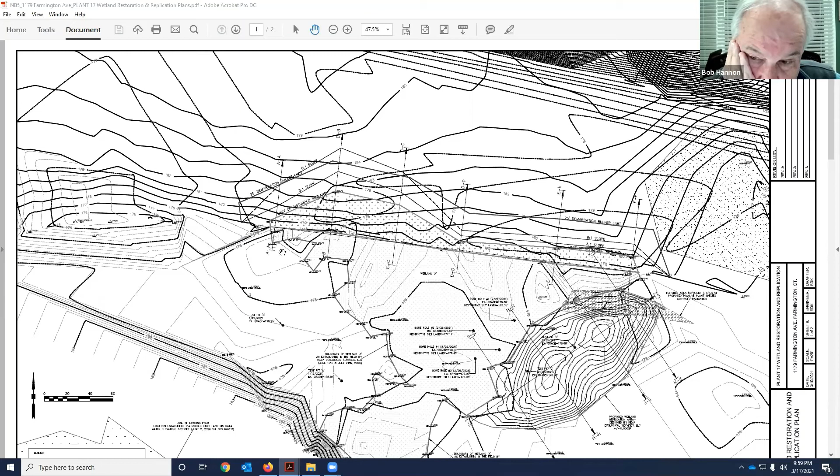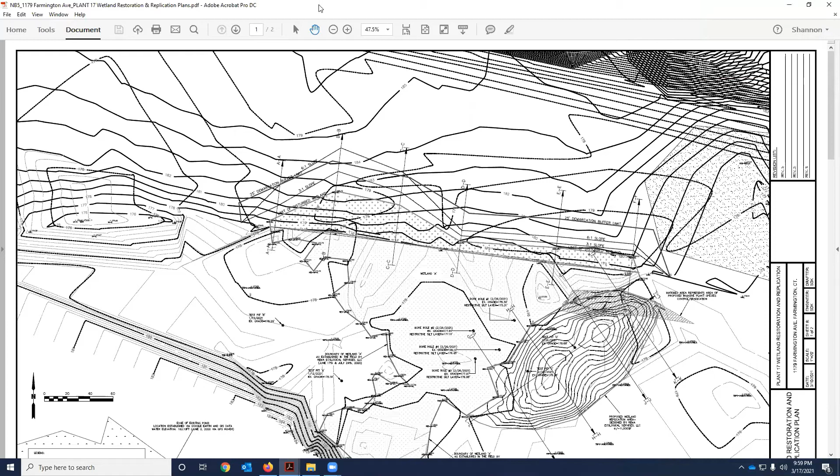The distance between wetland A and wetland B? Yeah, just an approximate distance. That doesn't, I don't think it shows on here. I don't know, George, are you still on the line? Well, I see his face. Yeah, I'm here and I'm thinking, we don't have it right here. It's off the side of the plan, obviously. So I would say it's probably 350 feet.

Okay, no, that's fine. Where I'm kind of going with this is, reading something from the Army Corps, it sounds like they're looking at vernal pool areas where a lot of the critters that utilize the vernal pools tend to come more from forested areas, if you will. So I'm assuming that because there is more tree cover around wetland A than wetland B, A might theoretically be the more important one to save. Is that a reasonable approach on this?

Yeah, I think that's a reasonable approach. And plus, when you set aside the issue with hydrology and how this is going to be done in the final plan, I think embedding potential amphibian habitat next to another wetland increases its ecological integrity than where it is right now, in wetland B, the northern lobe. So I think this is a much better situation because it'll be surrounded by wetlands or uplands that will be preserved.

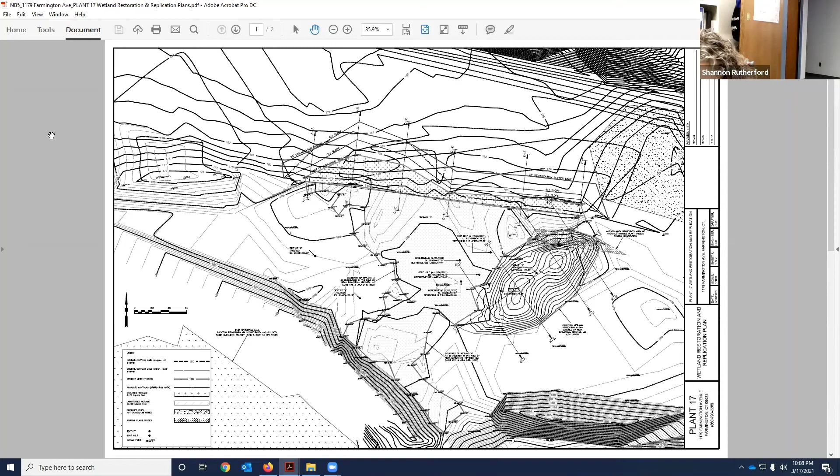So are we at an end here for the evening on this one? Sounds that way, unless any commission member has other questions. No, but I am glad to see some progress being made, so for that I am thankful and appreciate the work people are putting in.

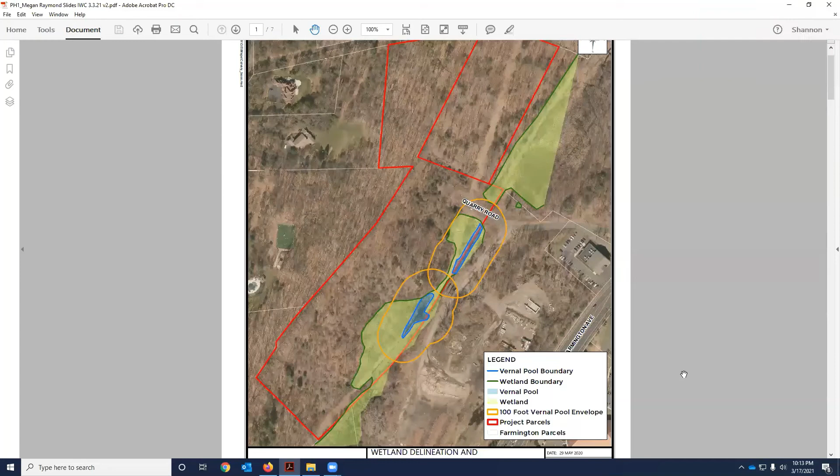So the question is whether there was a significant activity associated with this proposed project, given the facts we're currently working with. I want to hit the issues associated with the definition of significant impact, see whether anything fits, and then determine whether the project falls under a significant activity. Whether people feel it does or doesn't, we need a formal motion on it.

But I'm looking at this from the perspective that, looking at the maps, it's really a very small portion of the overall site development that is within the 100-foot setback. And as far as I remember, there's no direct impact on any of the wetlands. So that's kind of where I'm coming from on it.

But I guess we'll bring them up one at a time. Shannon, I don't know if you've got the regulations pulled up at one point, but if you can find page W5 in the regs.

Sorry, my brain's working on super slow. Hang on a second here. At least yours is working.

Bob, while Shannon's pulling up the regs, I concur with the course of action. I think it's appropriate to go back and revisit the foundation of whether or not there was a significant activity. I concur, because we need it for the record — if there is a significant activity, there are other issues we have to deal with, and if we don't feel it's a significant activity, that takes a different approach.

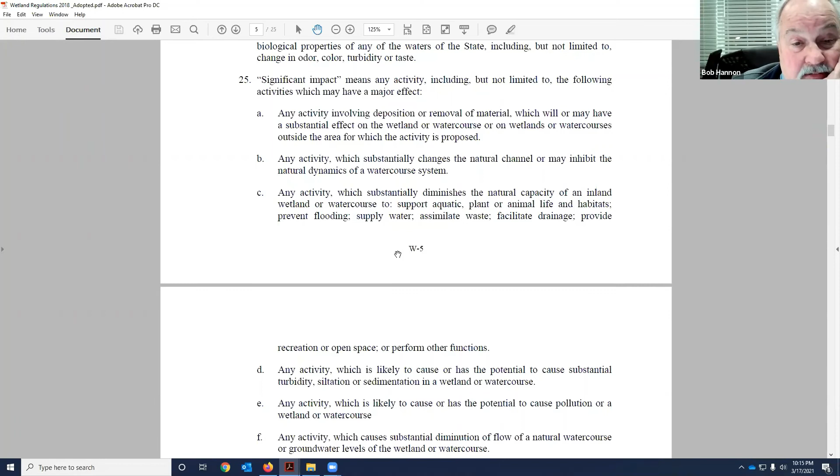The first one in A: any activity involving deposition or removal of material which will or may have a substantial effect on the wetland or watercourse, or on wetlands or watercourses outside the area for which the activity is proposed. I don't see it for this project. I really don't. There's no direct impact on the wetlands. For the most part, the activity being proposed inside the 150-foot area is the detention basins.

So I don't know how other people feel about this one, but I'm just trying to get an idea as to how people feel about whether this does have a significant impact. I'm with you on this, Bob.

Do we want to do just a preliminary poll to see if this is something we need to discuss? Well, I think we need to do this because it will have an impact on any decision we make.

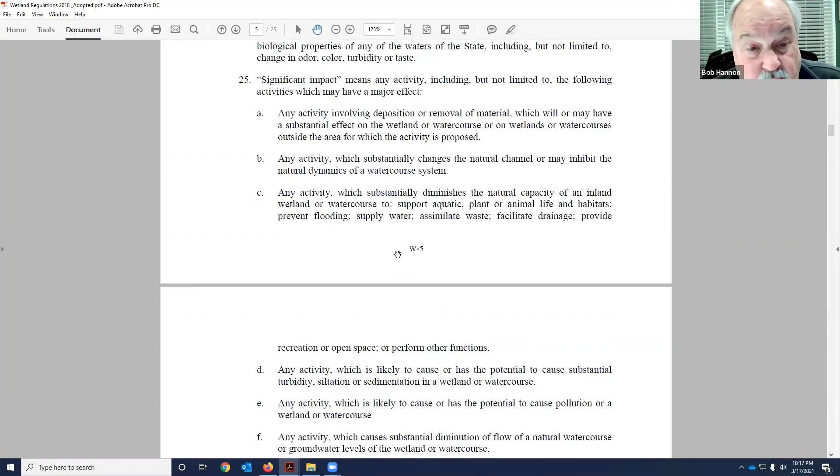I guess the big question is, I don't know if people have actually gone through these particular categories. There's 7 of them, and I'll deal with all 7 at one time. I just don't see it, because what's being proposed is outside the wetland area. There is no water course there, so that eliminates things. I know one issue brought up is it could impact subsurface drainage, but that doesn't necessarily have anything to do with us because wetlands are based on soil condition, not what may happen with water permeating through rock and whether there's additional calcium or other materials it may dissolve and bring to a given area. That's not under our jurisdiction.

Bob, I also think it's important to make sure we're all on the same page for the discussion, that for the assessment of significant impact there is a difference between the wetland and water course itself and the upland review area. The significant impact is talking to the specific wetland and water course areas, not the buffer area.

Bob, this is Jay. Can I make sure I understand what you're doing right now? Yes, I just want to make sure I'm clear - you're suggesting that we go back and revisit and maybe rethink the initial determination? No, I'm not. No, it's not to go back and do that.

I think the reason we made the original decision to have the public hearing was because of the size and scope of the project. It was very close to some vernal pools, it was close to wetlands, and I think because of the size of the project that's why we opted to hold the hearing. What I'm trying to do now is get a feel for commission members as to whether or not they think this activity creates a significant impact, or it is a significant activity.

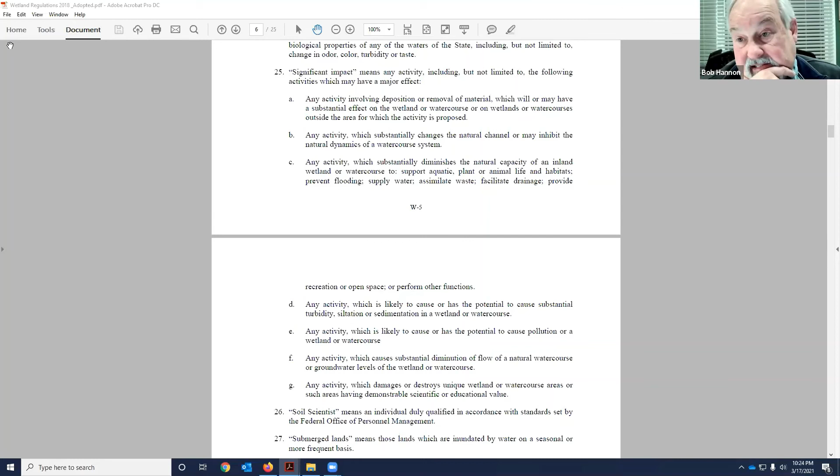I mean, do people at least agree with that one? Yes. Yes. Yeah, I agree.

Mr. Chairman, I've read through this and I appreciate Shannon pulling together all the background information prior to the meeting. My conclusion is that the proposed project does not represent a significant activity based on these seven criteria.

Well, these are for significant impact. There's a different set of criteria for significant activity. Correct, it's getting late, I meant to say significant impact. I know, believe me, I've had problems with this all day long.

But where I'm trying to go with this is I'm hoping that we can at least come to a decision on whether or not this is a significant impact, so that we can get to the next step, whatever that is. In terms of rendering a decision, or at least allowing Shannon to go ahead and start doing some work to get to that point.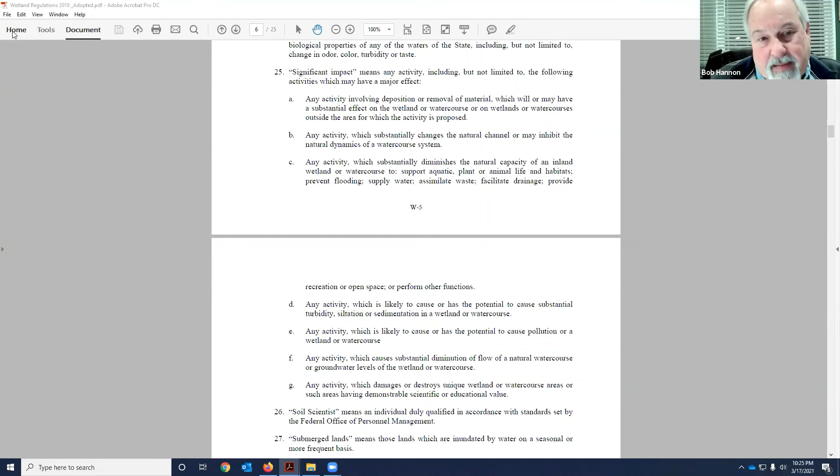If it's easier for people to just take a quick look at these things, we can discuss them one at a time. Just do A, what do people think? B, what do people think? C? My take is, I don't think any of these things are applicable here.

I don't know, Bob, Mark? I think if we go through these, we're going to come to the same conclusion.

When you say significant, I think anytime we're dealing with wetlands that include vernal pools, that is why I think it's significant. I think that is why we decided to have a public hearing, but I don't think the project is going to create a significant impact to those wetlands and vernal pools. So the only thing significant here is the fact we're dealing with vernal pools, not that the project itself will have a significant impact on those vernal pools.

So, Dave, do you want to chime in? Dave, still here? I'm here. Oh, so, and I don't know if I'm being nitpicky or not, but I'm looking at...

I've really tried to understand and comprehend how we go about making the decision, and I've actually asked for clarification a couple of times, and Attorney DiCrescenzo addressed my question. But I'm looking at the word significant, and I don't know if we're at this point yet, but a significant potential for impact to wetlands is insufficient.

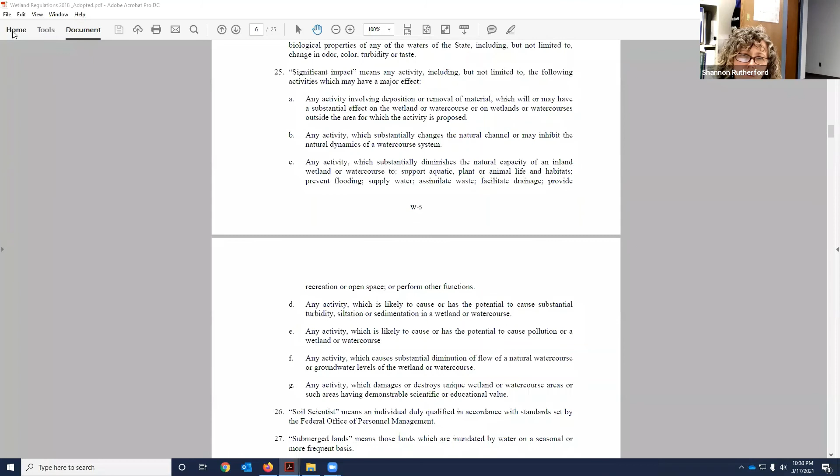And that matters because it triggers whether or not, if you say no, then okay, that discussion's kind of finished and pushed aside. If you say yes, then it triggers a discussion regarding feasible and prudent alternatives. So that's why we have to kind of go through this in some type of systematic way. Does that, hopefully that's helpful.

It does. I'm looking, I have part of the language in front of me, and it talks about the commission's decision to deny a permit based on substantial basis and adverse impact, and significant isn't in that language. So I guess I was thinking that this whole set of paragraphs I've been looking at were part of the decision-making of the permit of the applicant and beyond the scope of the intervenor petitions, but I guess I'm wrong.

We're specifically reviewing the definition of significant impact. And if you're just on your phone, you're at a disadvantage because you can't see what we have on the screen, which is pages W5 and W6 of the regs. I'll shut up now. Not that I have to shut up, but I guess maybe I'm off, maybe I'm a little off base.

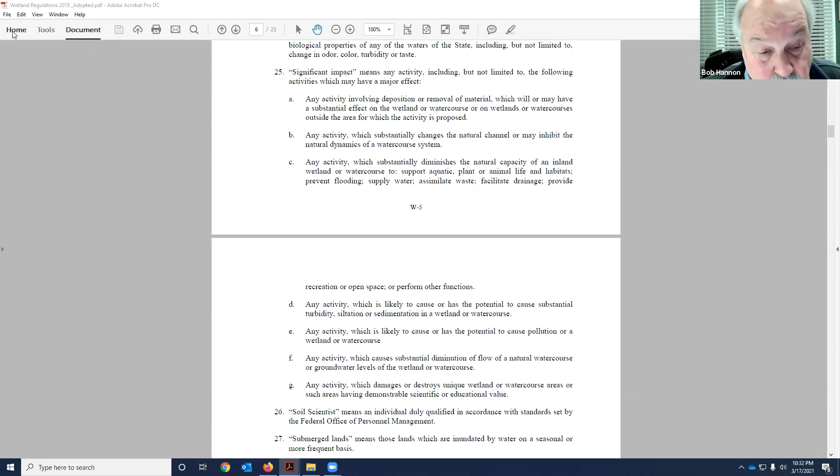And I get where you're going. When I heard significant activity, that was why I asked you the question at the very beginning, Bob, if we were revisiting the initial decision we made. We made a decision to call a public hearing because the project was considered significant, but now we need to make a determination as to whether or not this project will have a significant impact, or if it is a significant activity associated with the wetlands. Okay, because we had the hearing, we can't go back and change that. So that happened. And there are other parts of the regulations that say if you had a hearing, A, B, C, and D. So I'm just trying to deal with whether or not people think this project will create a significant impact or if it is a significant activity.

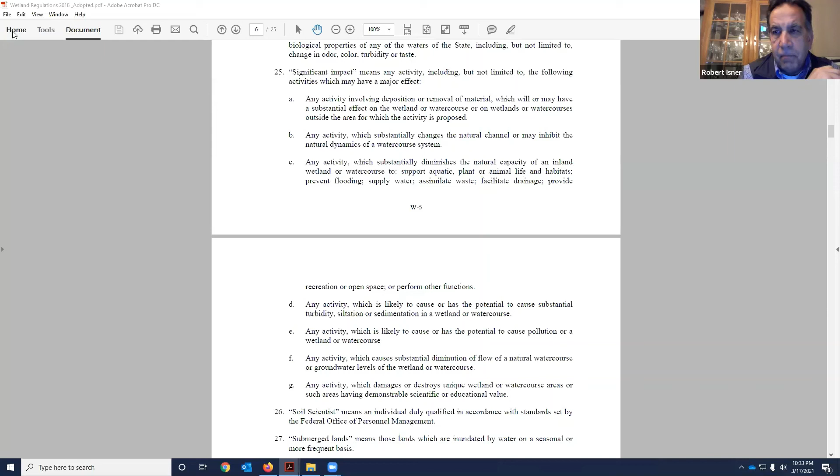Okay, and Bob, what I've heard so far is Mark, Ned, you and me have all weighed in that the factors in the definition 25A through 25G are not applicable. It's not a significant impact. Is that correct? That's my take. That's my feeling. Dave, did you? I would agree too, this is Dave. I would agree that it doesn't meet the definitions of significant impact.

I think the fact that there's no direct impact to the wetlands rules out probably A, B, and C. D, E, and F, I looked at as what stormwater from outside the wetlands might do to impact the wetlands. But I think the stormwater collection system has a lot of elements that will treat the water quality so as not to cause pollution of the wetland. And also it mimics the actual flow of the existing site, as described by the applicant, so that it's not going to result in a diminution of the flow or the groundwater levels of the wetland. So D, E, and F are okay. And again, G, the wetland is being avoided, so it's not going to do that. So I would agree that it's not a significant impact.

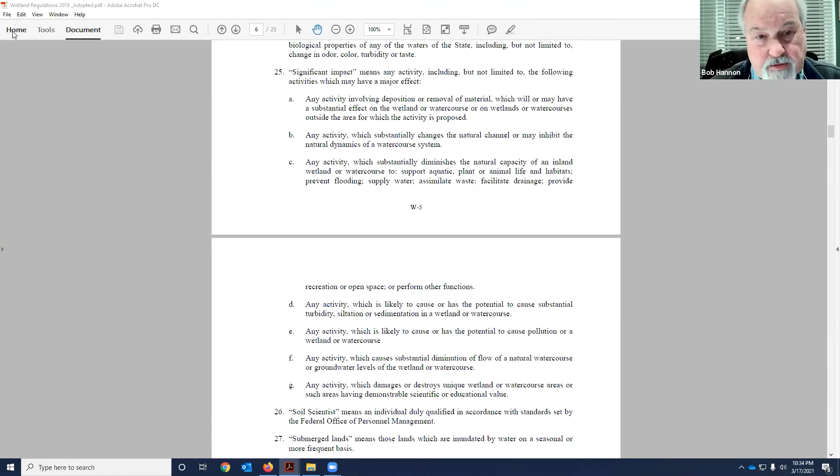Okay, so the take I'm getting is that we do not feel as though the application as submitted and presented would be a significant impact on the wetlands. Just to put in my 2 cents, and I'm not nitpicking this time, as you can tell I've struggled with this and agonized over it, probably like we all have, because there's been so much to absorb here. But ultimately, I agree with what everyone else is saying. Just for the record. Thank you.

So then, moving to page W12, which I think is the next spot.

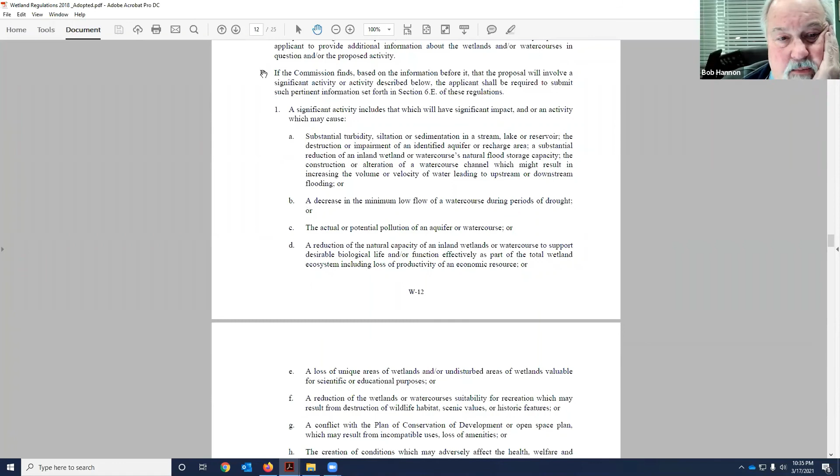This identifies the criteria dealing with a significant activity. It's A, B, C, and D here, and it goes through H on the next page.

That's probably pretty good because again, a significant activity includes that which will have a significant impact or an activity which may cause it. I've looked at these things, and the only one I had some difficulty with was G, which is a conflict with the plan of conservation and development or open space plan.

Which may result in incompatible uses, loss of amenities. But I've never known the plan of development to be grounds for even denying something with planning and zoning. This is a fluid document. It changes—I think we're supposed to update it every 10 years. It's something that's going to change over time with the town. It's sort of a roadmap of where they think they might like to be, but it's not like our regulations. So that was the one I had some trouble with, but even with that—

Nobody ever formally submitted a copy of the plan of conservation and development with the application. I think it was attorney Shiensky who had discussed it. But that was the only one I had fitting in with the general category.

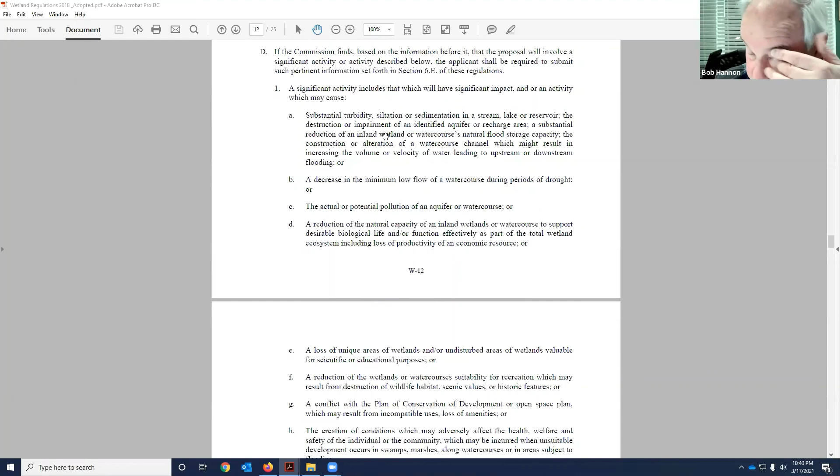Hearing nothing, those in favor of a motion saying this is not a significant activity, say aye. Aye. Aye. Aye. Opposed? Abstaining?

So with that, Shannon, I'm going to ask that you go ahead and start working your magic to draft a resolution for our consideration for the next meeting. Okay, will do. So that we can get all the i's dotted, the t's crossed, the bold where we need bold, underline where we need underlined, whatever.

So my take is, because of when the hearing ended, which concluded on the 3rd, we've got 35 days to render a decision. Yes. So that comes in at our next meeting, which is what do we say? April 7th?

35 days. The thing that we basically said by the vote tonight was that people did not feel as though this was a significant activity. Therefore, it does not bring into play the prudent and feasible alternatives. So that is not a requirement. So that is part of the reason for having a formal vote on it. So we should be able to move forward on that.

And I just want to thank everybody for their patience with me and their stamina to deal with these issues. I mean, it's been a long, arduous process, but we will be getting there.

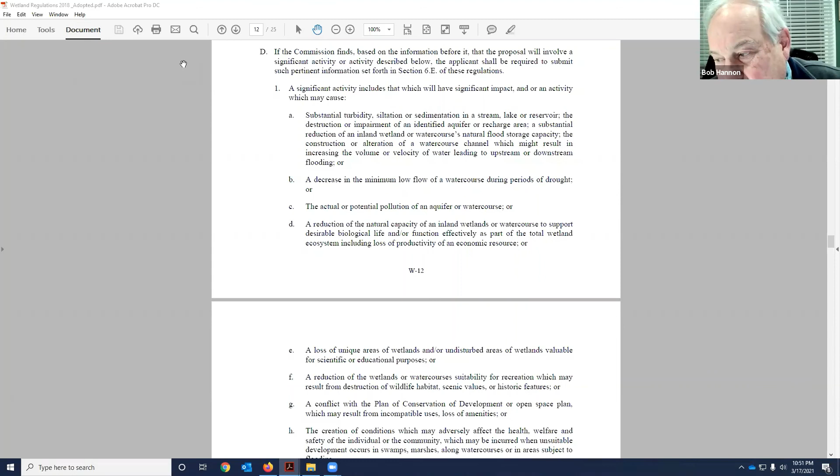Look at it this way, Jay — most of it is in executive session, so you can't talk about it anyway.

Okay, Shannon, anything on planner's report? I'll try really hard to live down Adam Jay Hoffman. Don't do what I did — I missed the first meeting because I had no idea it started at 5 o'clock.

No, I don't have anything further for planner's report this evening. Thank you. And can I get a motion to approve the minutes of March 3rd, 2021 for the Conservation Commission meeting?

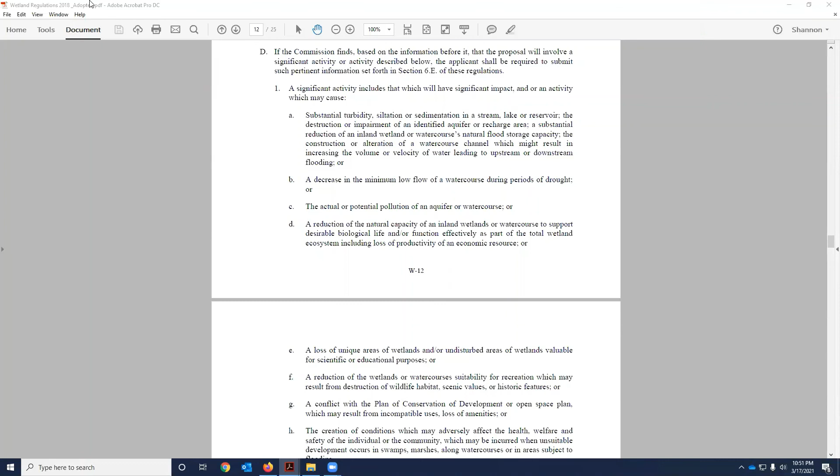So moved. A second? Second, Mark. Okay, those in favor, say aye. Aye. Opposed? Abstaining? Thank you, everybody, for your time on this.

And fortunately, I haven't heard anybody's head hit the desk. No, we all made it.

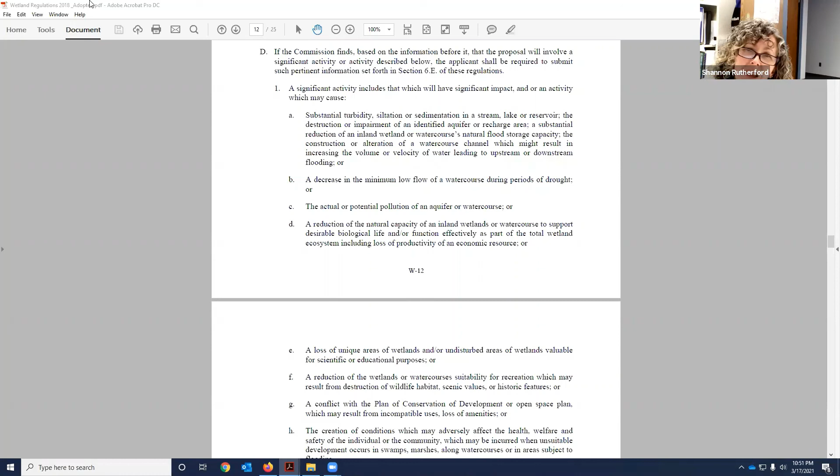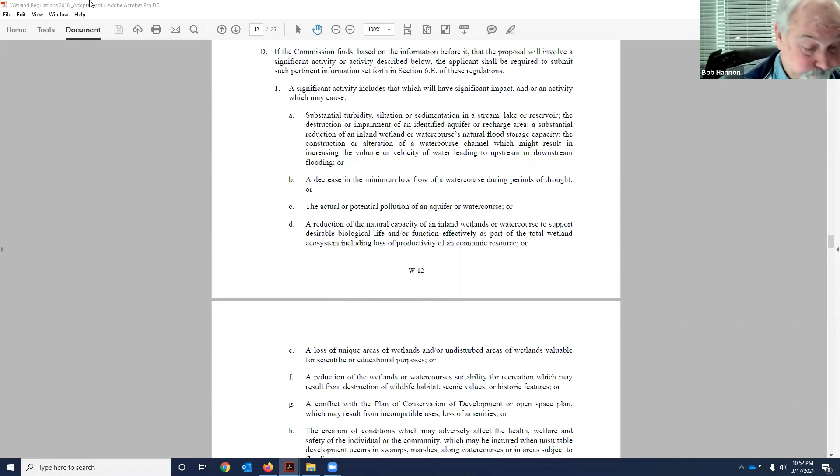But again, I do appreciate your effort on this thing, you know, with this project. This has not been an easy one. So I do really value your comments, your opinions, and your fortitude to get through this thing. So thank you. And with that — thank you for your leadership. Thank you. You're welcome.

So I think with that, we can adjourn. Yay. All right.